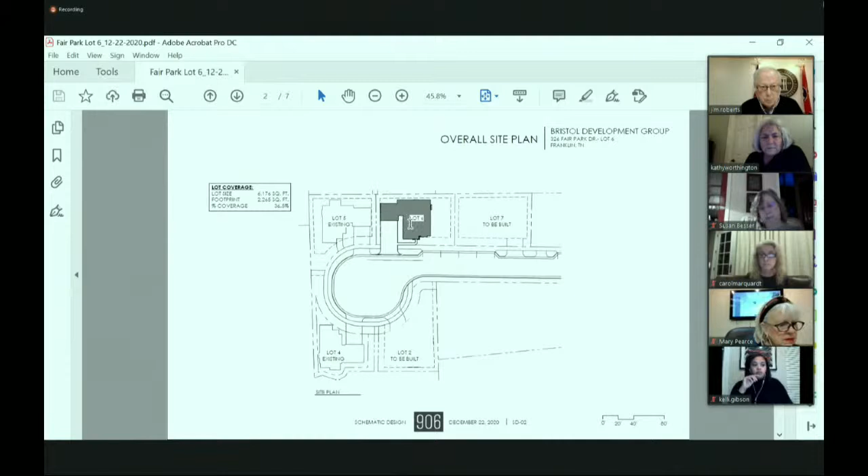Okay, so you can see on the screen here, the lot's not very deep, but it is a little wider. So it does allow for a bit of separation between these two forms, creating two masses instead of one. You can see the first floor plan here, the garage is attached with a small connector, and it does read very largely as two distinct forms. While the garage can't be behind it, I believe it meets the intent of the guideline that the massing is separated. Additionally, the placement of the garage helps serve as a lesser massed transitional piece.

You can see from this angle here toward the Fair Street Historic District and the historic forms on Fair Street. The height of the proposal at 29 feet is mostly consistent with the guidelines.

It is consistent with the portion of the guidelines that state infill construction should not exceed an average of 10% above or below the average height of buildings on the same block face, on the same side of the street. The buildings that have been approved for this street, which is a cul-de-sac street, range in height from 32-8, 29-11, and then there is a building on the same block face not part of the Fair Park subdivision that is approximately 34 feet in height.

The guidelines do also state, however, that the height of infill buildings on newly created streets should be compatible with the range of building heights on the nearest block face within the established historic district. The buildings behind this street on Fair Street range in height approximately from 24 feet to 31 feet. So it does fall within that range, but I don't have the exact heights and cannot do a conducive calculation to say if it's 10% above or below that average.

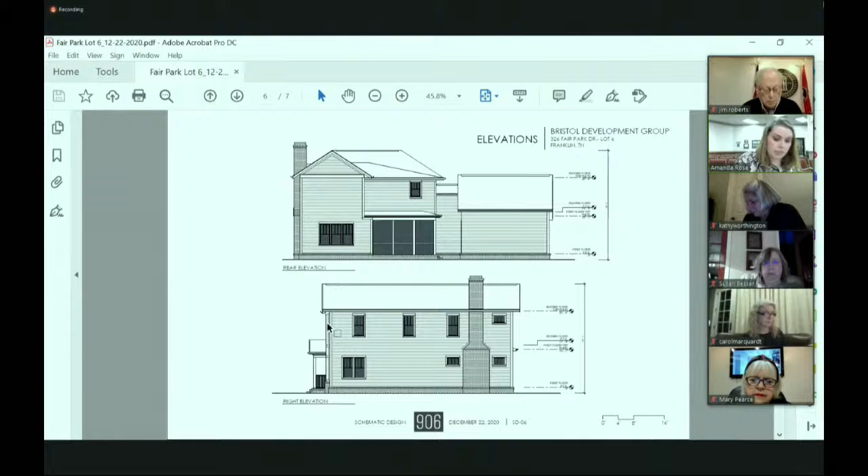Also, in lieu of using an awning on the garage doors, the applicant has extruded the roof line to create a covering over the garage door area. This is a treatment that allows for the perception of a roof dormer here, which actually is designed as a wall dormer. So it does appear to have a dormer that sits a couple of feet off the roof, even though it's truly designed as a wall dormer.

Again, this treatment is atypical to historic structures, but because this is an infill street and both the principal and garage structures are created on this newly created street, this interpretation may be appropriate.

The proposed materials are all consistent with the guidelines, though window specifications have not been provided at this time. The proportion and rhythm of the window openings are mostly consistent with the guidelines as well. I'll note that the applicant did alter the window in the front-facing dormer of the garage to be placed more consistently with that on historic structures based on a design review committee comment.

Regardless of the comments for design, the building itself cannot be recommended for approval as the building coverage shown by the applicant is 36.6%. The guidelines recommend that building coverage maximum not exceed 35% in specified residential zoning districts, including this one. With that, it would be recommended that the proposal be denied.

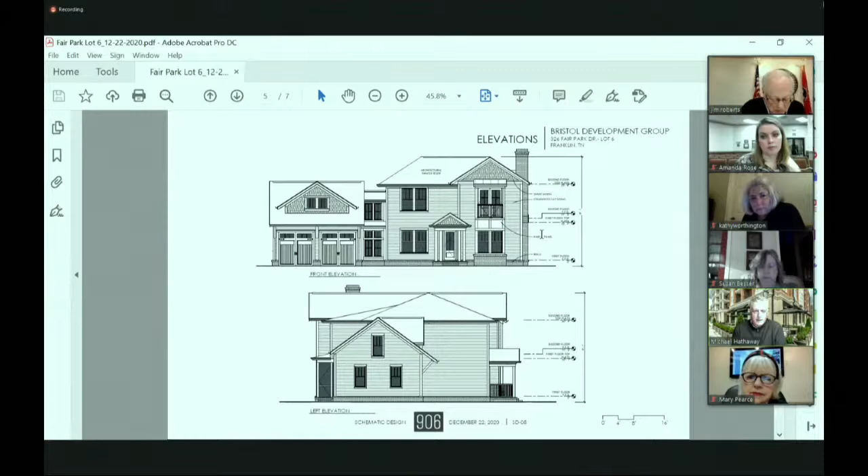Like it was said earlier as well, we have worked hard to keep the height low. I think we're at 29.1 now to the top of the roof, and that was after a lot of conversation and effort to try to get that down. So we appreciate your consideration of that as well, and we'd be happy to answer any questions, and we would ask for your approval.

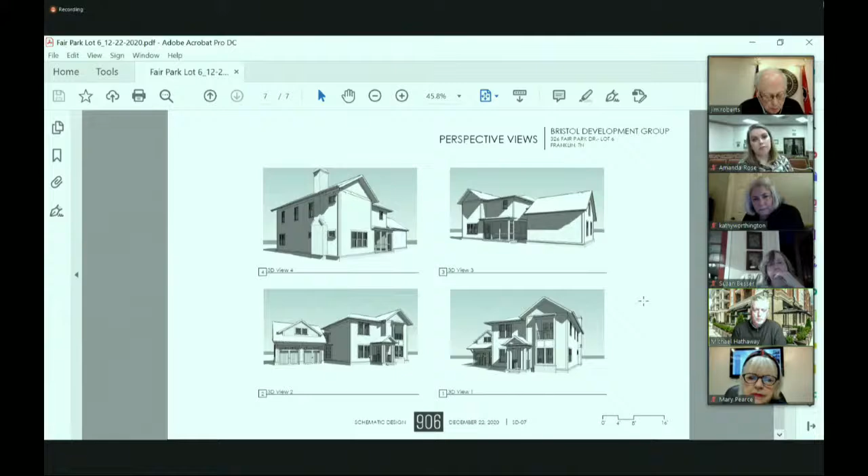Thank you. Are there any citizens who wish to comment on this application? Hearing none, is there a motion from the commission?

Mr. Chair, this is Brian. I'd like to start the conversation by moving that we approve issuance of a COA for the proposed new construction based on the staff analysis recommendations dated January the 7th of 2021. They're recommending denial, so I need to get a reason for the approval. Well, I'd like to continue this conversation about that 1.6%. Okay, all right, that's fine.

Is there a second to that motion to approve? I'll second, this is Lisa. Thank you, Lisa. Okay, now we're ready to discuss.

So, Mike, I do have a question. You said you've kind of done all you can to reduce that square footage, and you think this is where it needs to be. Could you elaborate on that a little more?

Sure. We worked really hard to make sure we create a house that's livable for our client, and that included the amount of square footage she needed for living space, dining, kitchen, as well as the garage. The garage uses up some of that percentage. Where it got larger was when we detached the garage and had that connector, which took us over that 35%. In practicality, other than the infill between the garage and the main house, we're at 35%. That just puts us over the edge when we have that connector piece.

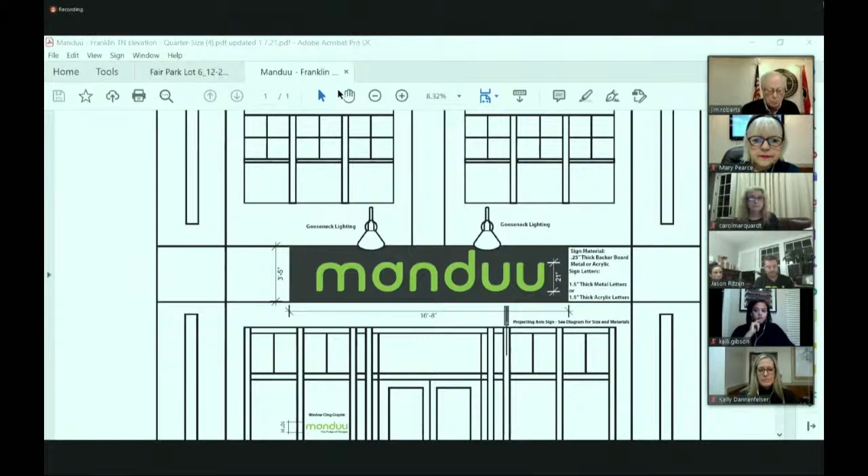The package includes a wall sign above the storefront and canopy, with gooseneck fixtures proposed to mount above it. I'm going to go ahead and share a photograph of that. This storefront isn't rendered exactly the same way it looks in real life, but you can see—I'll try to zoom out a little bit.

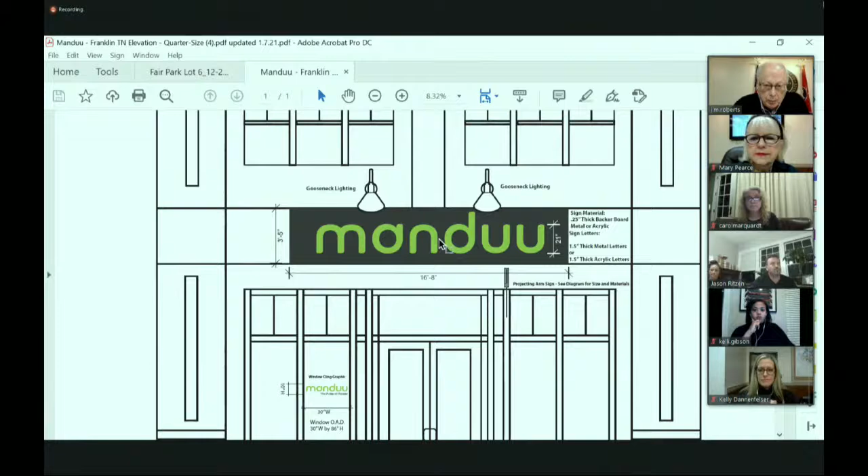The storefront wall sign is proposed to be over the canopy. There is a canopy that comes out from the building, spans the whole front facade, and this would be above that and underneath the second floor window sills. The applicant is also asking to install a projecting arm sign adjacent to the storefront. It would either be to the left of the storefront here or to the right, underneath the canopy. That would be a pedestrian specific sign.

And then the installation of a window decal sign. On the submittal you received, there was a black backer for the window decal. That backer was removed at staff suggestion so the applicant may have a little more flexibility in how the lettering is used and how it's configured on the window itself. The applicant did take that into consideration, and I appreciate that. So what you see is a little different than what you have in your packet.

As for the wall sign, the guidelines would recommend that wall signs be placed in typical locations similar to that on adjacent neighboring buildings. The wall sign's proposed to be at this location, rectangular in shape, and centered over the storefront entrance. This is a wider storefront than some of the tenant spaces in this building will have, and the applicant is proposing to put it centered right over the front entrance.

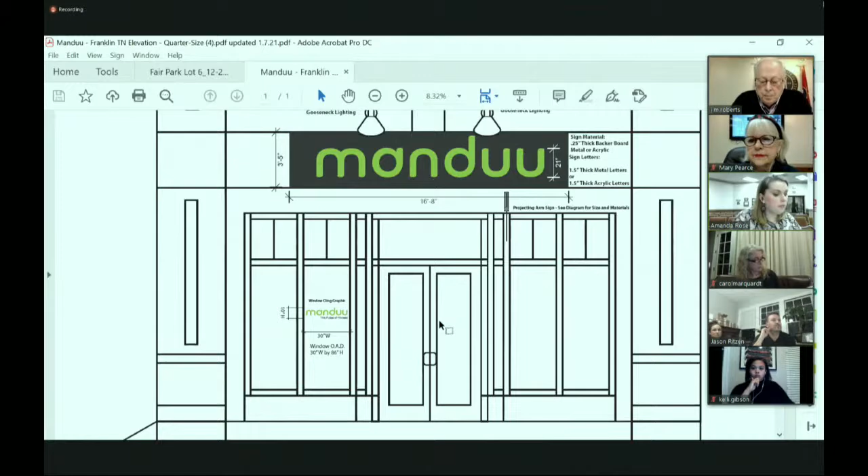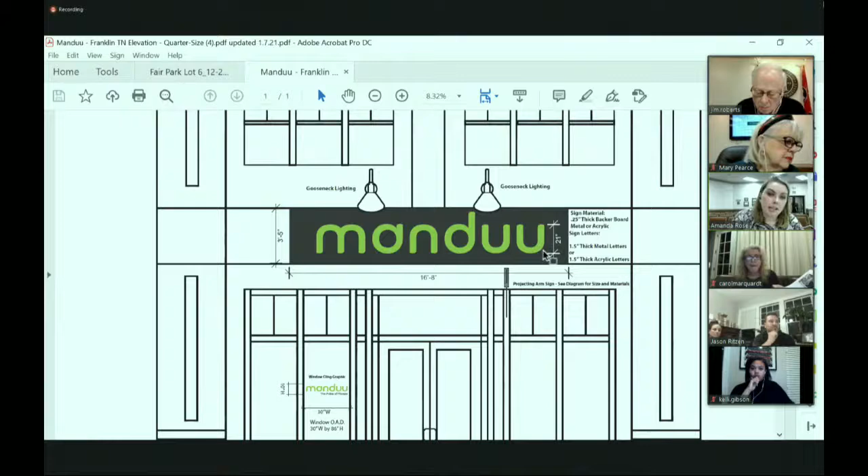The proposed location is very typical of neighboring buildings, but this storefront includes an approximate 1-inch vertical brick projection that bisects the upper facade between the two windows. I can pull up a photograph if that helps refresh your memory, but that 1-inch projection causes the sign placement to not be entirely consistent with the guidelines, as they recommend against placement of signage over any decorative detailing or original decorative designs. They also state that wall signs should be mounted to flat surfaces of the building.

So what the applicant has proposed here is to use a metal backer and have it placed flat on the brick that projects out, then use spacer bars underneath, about 1 inch thick, to allow the sign to be stable and flush against this brick, but not necessarily flush against the brick on either side.

The guidelines also state that materials should be consistent with what you would see historically, generally emulative of metal or wood. The backing is metal, and the lettering is metal or acrylic. Acrylic would not be recommended by the guidelines, as it's a lesser historic emulative material. The metal would be appropriate.

The color of the background is a dark gray, and the lettering is green. The proposed coloring is mostly consistent with the guidelines, though not entirely, as the recommendation is that the sign have a darker background than the lettering color, which is evident here, but signs should also complement the colors of the building. The green has, I believe, been adjusted slightly, perhaps from the branding green, but it's not entirely in keeping with the building brick itself.

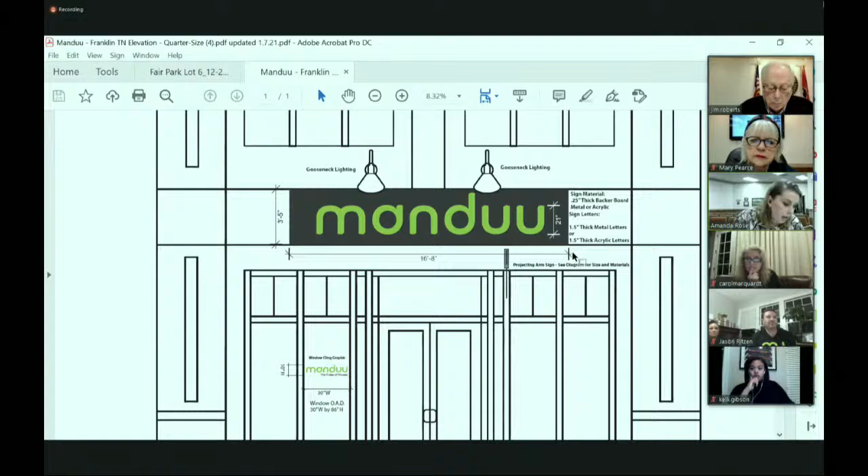The wall sign measures 3.5 feet tall within this quote-unquote cornice area, and another 16 feet 8 inches wide, which is not consistent with the guidelines. The guidelines would recommend that wall signs measure no more than 1 square foot per linear foot of the width of the storefront. I went out and measured the storefront this morning.

It's a beautiful morning to go out. It's super gorgeous right there by the river. And the storefront is a unique one, in that I measured from engaged column to engaged column.

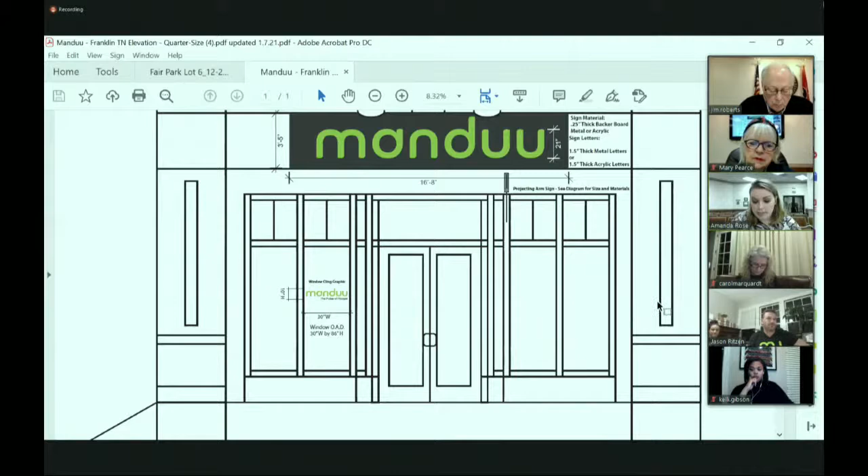This space between the two engaged columns is 24 feet 10 inches in width. Then there's another space where the columns are, where the color of the brick is still the same as the rest of the storefront, because, as you can recall, the building itself has slight color changes from storefront to storefront. If you count the area on either side where the color is still the same, that adds an additional 3.5 feet on each side. So with all that considered, the building facade would be about 32 feet wide.

Because of that, the guidelines would recommend that the wall sign itself, in order to maintain a sense of scale with the facade, measure no more than 32 square feet. This sign is proposed to measure about 58 square feet.

The proposed lighting consists of gooseneck fixtures here, and those are consistent with the guidelines, as the guidelines would recommend that light fixtures be used to illuminate from top to bottom, essentially, and that they be unobtrusive. This is entirely appropriate with what you see on other buildings, and is consistent with the guidelines.

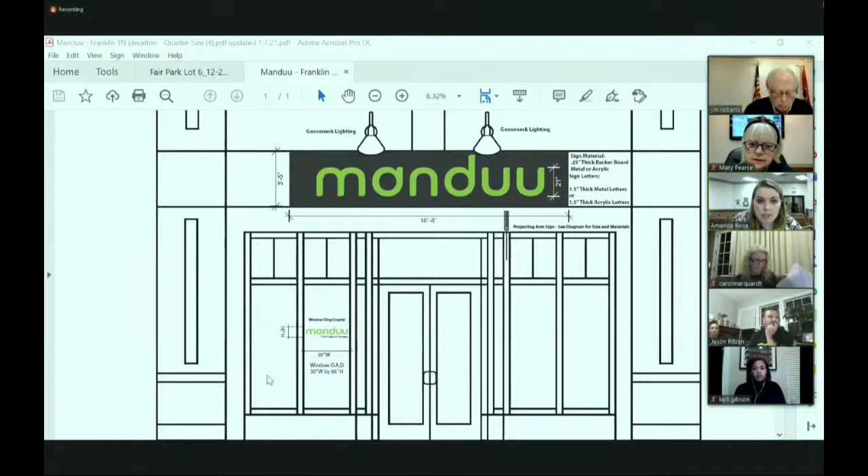There's also a projecting arm, proposed to be underneath the canopy. I'm going to pull that one up right now and share that with you. Can everyone see the projecting arm?

Similarly to the wall sign, it is a dark gray with green and white lettering. It is proposed to measure about 5 square feet in total sign surface. The guidelines would recommend that projecting arm signs not exceed 4.5 square feet, so this is slightly oversized in respect to the applicable guidelines. The sign's coloring is the same as the wall sign, which is mostly consistent with the guidelines.

The sign would need to be placed so that the bottom of the sign is mounted 8 feet above the grade surface, which in this case would be the sidewalk underneath the canopy. Because the proposal does not indicate specifically where this sign is proposed to go, it would need to be placed on either side, either left or right, not above the storefront, and be 8 feet above.

The window decal sign, I'm going to switch back over.

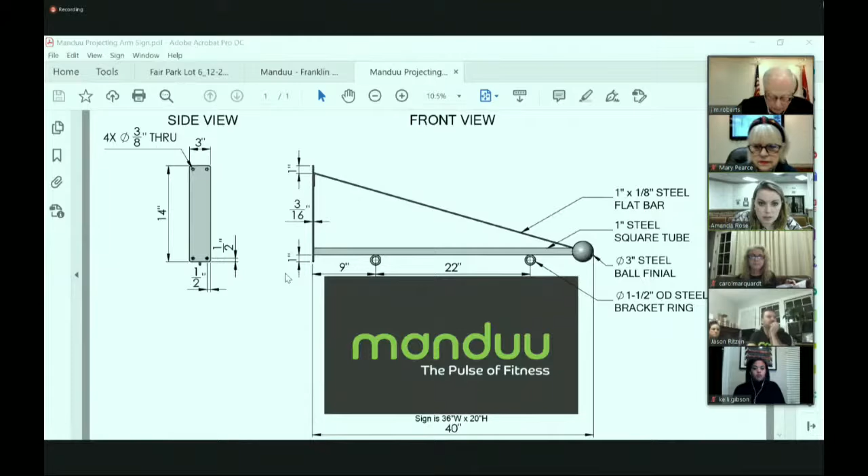There it is. The window decal is proposed to go here. The guidelines would recommend that window decals consist of lighter lettering and not distract from the building facade or engross the window. This design is entirely appropriate.

The ordinance under which this building project has been approved is the previous ordinance, which states that the window decal can measure up to 25% of the window glazing, and I believe this is sized to meet that. Of course, that's something they'll be asked to consider at the sign permit stage. But please note, these notes under here are not part of the window decal — it's just this right here, and it appears to be entirely appropriate.

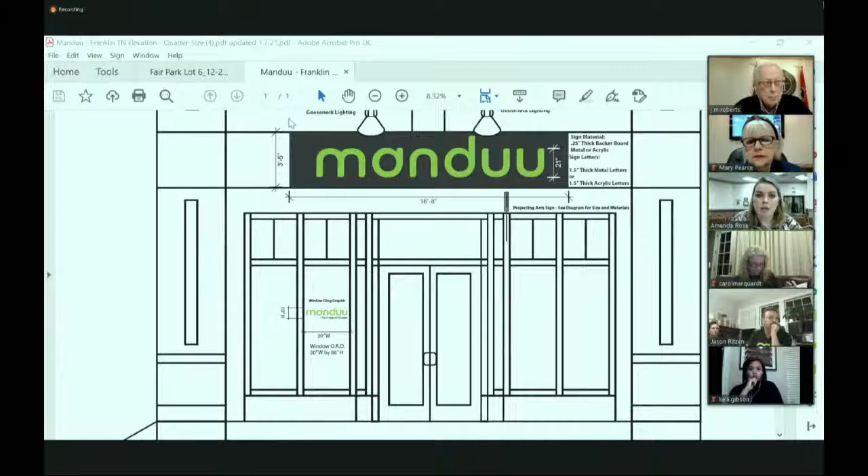With that, it is recommended that we have two different motions. One motion would be to deny issuance of the wall sign based on staff's comments that the sign placement does not entirely meet the intent of the guidelines. That would be something that would need to be considered by the commission, as this is a unique situation.

If the commission determines that the sign placement is appropriate, the applicant must confirm the storefront width — we believe that to be about 32 feet — so that we can determine the appropriate sign size based on the guidelines, and that size would need to be rescaled accordingly.

So from what I've gathered, the 58 square foot sign would need to be reconfigured down to no more than 32 square feet. The application must meet all the other requirements of the Building and Neighborhood Services Department prior to issuance of a sign permit, and any changes returned to staff or the commission for review prior to approval.

As for the projecting arm and window decal signs, it would be recommended that the commission approve with conditions. The conditions being that the window decal sign as shown tonight be accepted, and that the projecting arm sign measure no more than 4.5 square feet, which would require a slight modification to meet the applicable guideline, and that be submitted to staff for review and approval prior to issuance of a sign permit.

That the wall on which the projecting arm is considered be indicated to staff as well, and demonstrated that the sign face is measured a minimum of 8 feet from grade to meet certain code requirements. And that is all. Thank you.

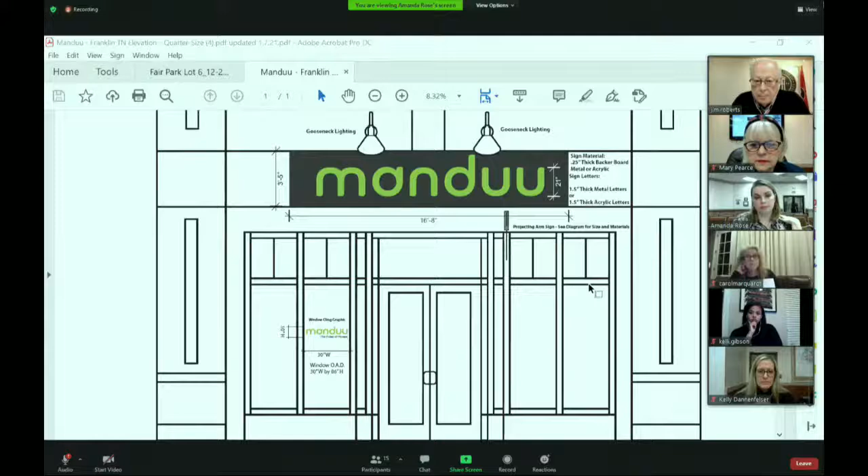There's a couple ways we could do this. Number one, the standoffs aren't ideal because, as a landlord myself, I understand stuff gets behind it and you don't want that. We could thicken the backing of the sign on either side so that the backing is absolutely flush with the brick at all locations. It would appear as though that brick outset simply terminates at the top of the sign. Okay, that seems to make sense to me.

I can pull the brick and make them flush underneath, which I'm not sure wouldn't do the same thing. But I believe our signage guy took a little bit of liberty in this rendering simply to make the backing match where maybe there's different ways the bricks were laid or something like that. But the backing can adjust to whatever size it needs to be.

The real thing is how to address this, it doesn't exactly matter what the overall size of the sign is, so long as it fits under 32 square feet, no big deal. We're fine with that. We just don't want it to look silly being on one side or the other. So I think the real question is how do we achieve placement of the sign in such a way that it looks right.

Because this is not the only example of this particular building we're going to run into, or you guys are going to run into, on a go-forward basis. So I'm kind of open to discussions and suggestions on how to do it. I just think it'll look silly if it's placed on one side or the other of this accent that's the same color as all the surrounding brick.

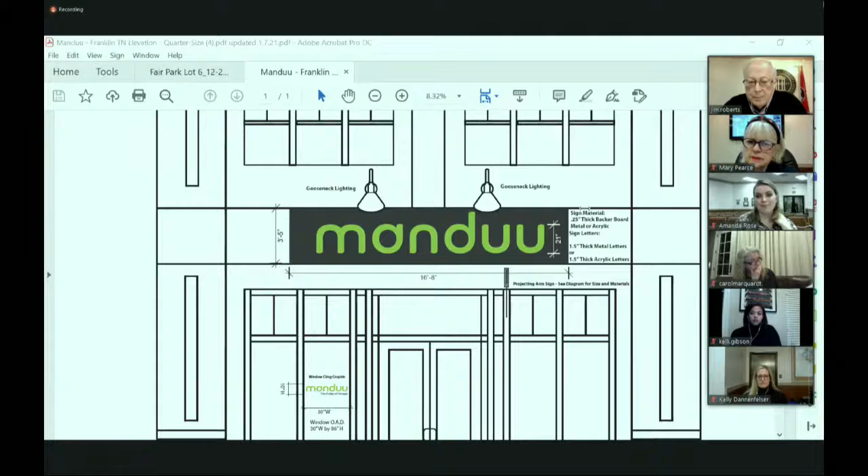So I'm kind of open to whatever everybody's got to say. Okay, well, we'll get into that. Are there any citizens who wish to comment on this application? And Commission, let's do this in two motions, one on the wall sign and then one on the projecting arm sign and the window decal. So is there a motion on the wall sign? Then we can discuss.

I'll move to approve the wall sign with staff comments. All right, that's going against the staff recommendation, Mary. On the wall sign? I don't mean the wall sign, excuse me, forget it, thank you. I thought we were talking about the arm.

All right, now comments. And let me just say at the outset, Mr. Fitzen, I don't have any problem with the way you've got it positioned here. The problem is the size of the sign, 58 square footage versus 32 square feet, assuming we're taking both of those vertical columns as part of your storefront, which I don't have any problem with.

So I think the main thing is it needs to be reduced in size. That would be the best solution. The mounting is fine, and I agree with you. It doesn't need to go left or right. I don't think you need to have any bricks removed. I think if you stub it off the wall an inch or 2, then you've solved that problem. So, other comments?

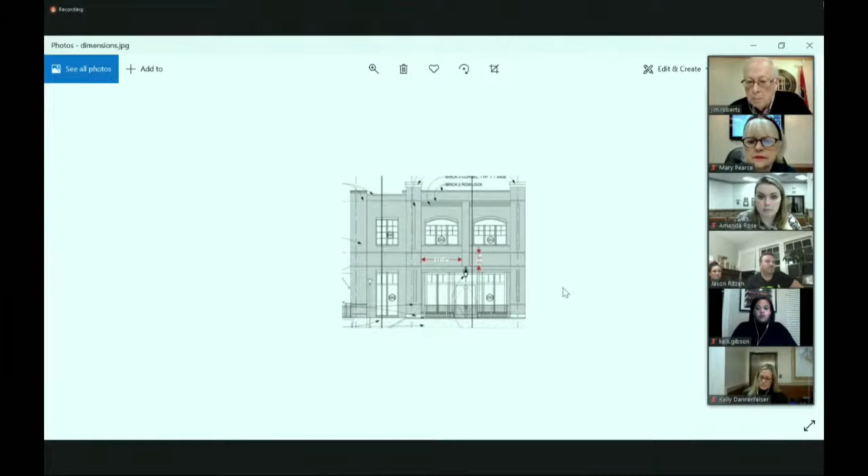So I think we won't see this every time we have someone come through, but it is something to keep in consideration. And then also reflecting back on some of our sign challenges with the building across the street, I think it behooves us in the future to keep those signs in mind as we look at storefronts and think about approvals of infill buildings in this situation. And Ms. Baker, I apologize, I understand what you were saying now.

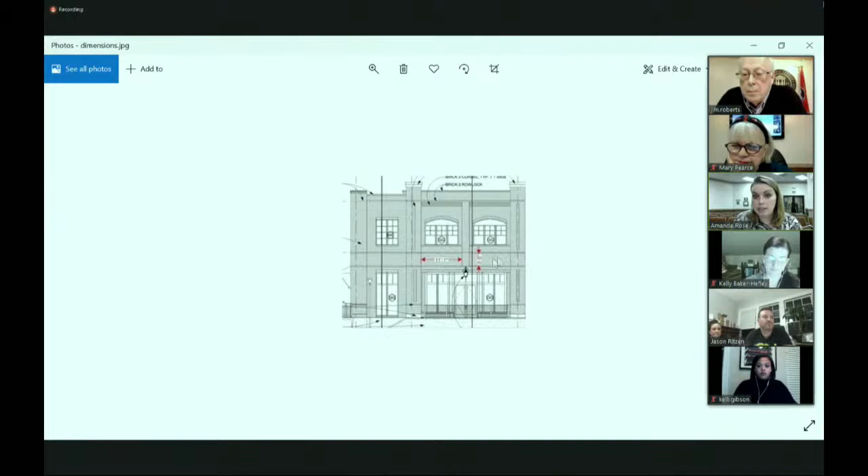You are absolutely correct. This is one where it did have 2 entrances, and it was brought to the Historic Zoning Commission's attention by staff that the architect for the entire building, not this particular applicant tonight, wanted to combine those into one storefront. So you're absolutely correct that this won't be an issue on every storefront that moves forward, unless there is a request in the future by the building owner to combine storefronts.

So for that reason, I'm more comfortable with this solution, especially given that we've got brick colors that sort of mask it a little bit. But just something to keep in mind as we look at future buildings, I don't think we've necessarily considered sign placement as we've looked at buildings and the way that they're constructed and the facades. And so something just to keep in mind in the future.

Okay, other comments? I have a comment. Oh, go ahead. Jason, I'd like to know, how does the awning affect the sign? Is it one large continuous awning that is mimicking the sign, or is it two awnings that go over each bay? No, ma'am, it's not a—

When you say awning, this is a structural—it's a flat panel, is it not? I can help answer that. And for everyone's understanding, Ms. Worthington is new to the commission as of today, and so she did not have the background on this building that some other folks may have.

It is a continual integrated brick canopy that comes over the sidewalk. And it's there because of considerations with how the building had to be constructed in light of the floodplain that a portion of the building is situated in. And so the canopy is below where the applicant is proposing the sign, but just below it. It extends the whole frontage of the building. Does that help? The structural overhang, you can walk underneath.

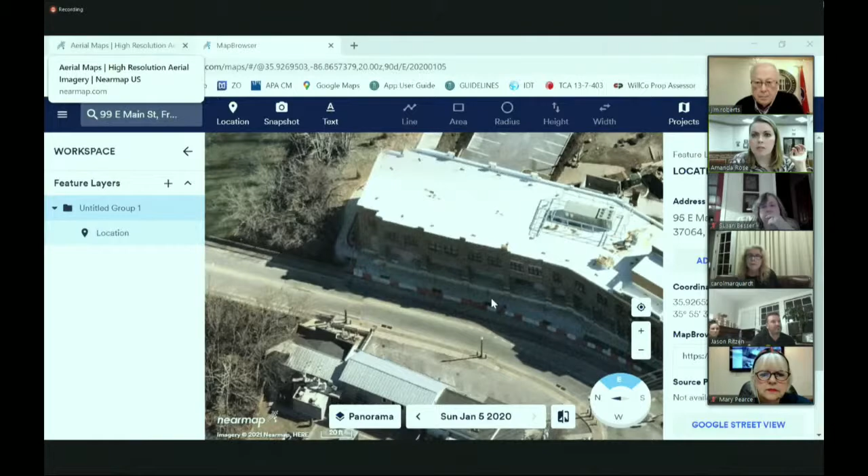Show the building really quickly, just so everyone can be familiar with that. I want to make sure everyone understands. Mr. Ritzen's explanation was a little better than mine. The canopy doesn't stick out as much as the upper story cantilevers to create a canopy, so the area we're talking about is right here. Does that help?

Okay, I'm sorry to interrupt, I just want to make sure - more or less a breezeway? Correct.

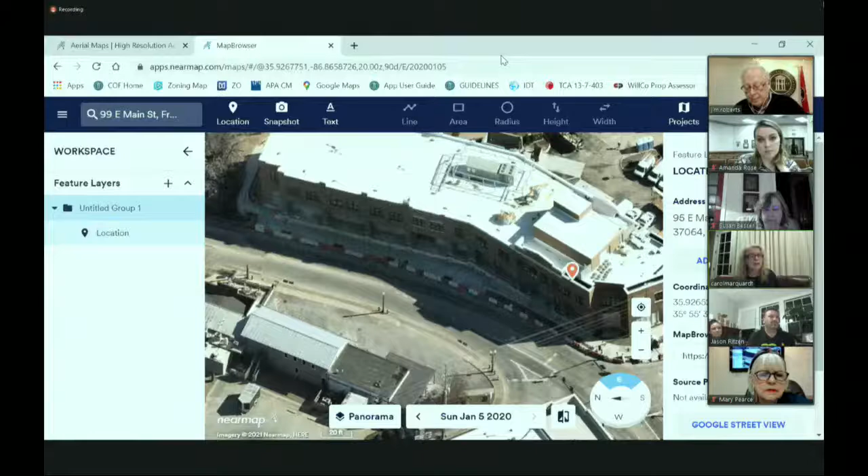Ms. Marquardt, did you want to make a motion to defer? Yeah, I think because, and I understand the applicants are between a rock and a hard place here, but there may be options we have not considered yet. So I would make a motion that this be deferred to design review.

You'd refer it to the next voting meeting, and they can come to design review. Yes, exactly - or defer to the next voting meeting and come to design review so we can consider some options. Is there a second? I will second. Thank you, Mary.

All right, we got a motion to defer, which overrides Mary's motion to deny. Is there any more conversation about that?

Mr. Chair, this is Susan. I just want to iterate that I think if the applicant came back with a sign more in keeping with the square footage of our signs, that would really help, because what's most apparent to me is that the proportions are really off with this sign. I think that will help us visualize what it could be. Thank you, good comment.

Okay, if there's nothing else, then please respond - this is a motion to defer. Question, quick question? Could I ask a quick question? Yeah, quick.

What I'm hearing generally is that you want me to come back with the appropriate square footage, same layout as I described. You may come back with another layout, you may decide to do something different - your sign designer needs to maybe have some other ideas. That's the purpose of design review. And yeah, you can come back with a different layout, a different size. Just looking for some guidance, that's all.

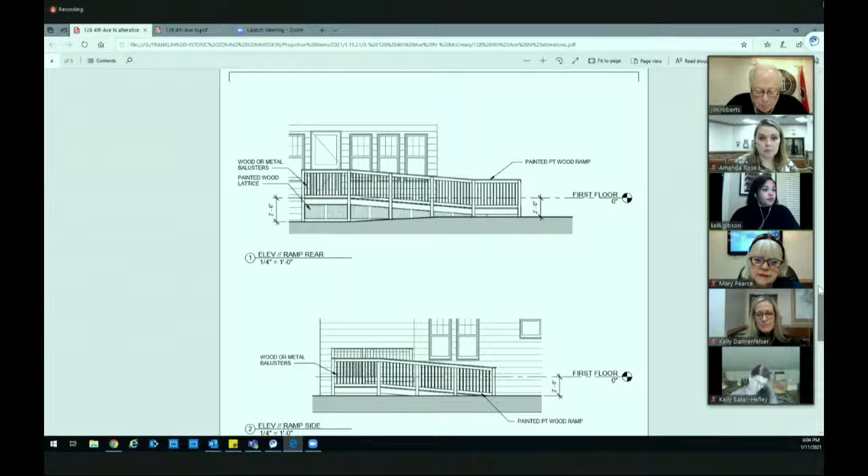The HVAC pad located here will be located on the rear elevation of the house, between the building here and the ramp here. The ramp provides screening to the HVAC units. The guidelines recommend that utilities be placed and screened to minimize their impact on the district, and recommend the use of placement, landscaping, and/or fencing to hide trash or utility units. The proposed HVAC placement is consistent with the guidelines.

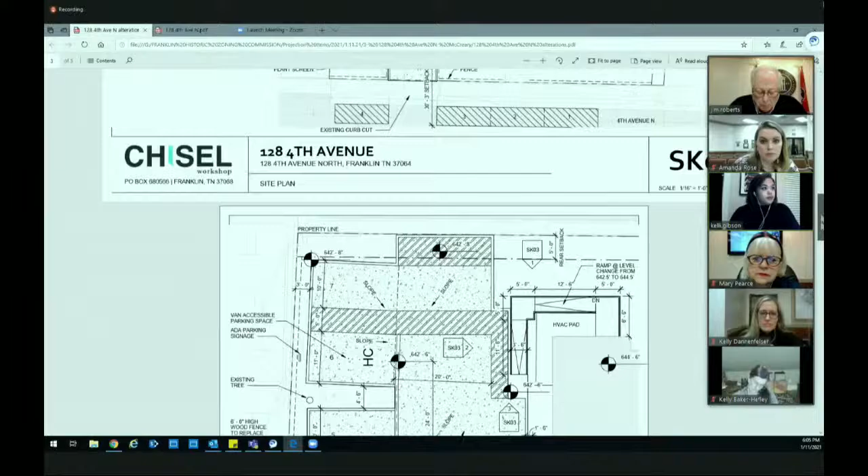The guidelines recommend that driveways follow historic patterns, be located along rear or side elevations, and should be landscaped to mitigate impact on the district's historic character. Driveways and parking configurations are required to meet the standards set forth by the zoning ordinance. The proposed concrete parking area, seen here, is located on the side of the building, but behind the facade of the home. Landscaping will provide screening to mitigate the impact to the district. The proposed parking and driveway alterations are consistent with the guidelines.

So for the ramp construction, HVAC placement, and parking and driveway alterations, it is recommended that the commission approve with conditions the proposed alterations as follows: wood balusters should be selected for the ramp for consistency with the guidelines, and the application must meet all requirements of the Building and Neighborhood Services Department, including but not limited to meeting minimum parking requirements. Any additional changes to the approved plans must be returned to the commission for review and approval. Additionally, staff has listed some information in the staff report for the applicant to consider before applying for permits. Thank you.

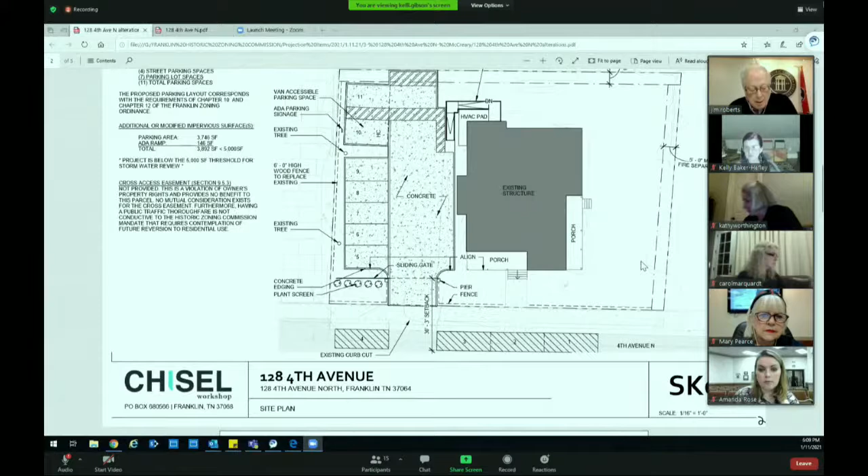The proposal includes the replacement of existing wood fencing along the western property line, seen here, and the construction of aluminum primary yard fencing, seen here and here. The proposed wood fencing is 6 feet in height and extends along the side yard of the property and into the primary yard. As proposed, the fencing is not consistent with the guidelines, which recommend that wooden plank fencing be recessed at least 20 feet from the plane of the residence's primary facade, and fence height should not exceed 3 feet in the primary yard.

Fencing style specifications were not included in the application and will be required in order for staff to fully review that request. The proposed aluminum fencing with brick piers extends across the primary yard of the property here and ties into a sliding gate of the same style and materials located at the entrance to the parking area on the side of the house here. The proposed fencing is consistent with the guidelines for height, 3 feet, but not for style.

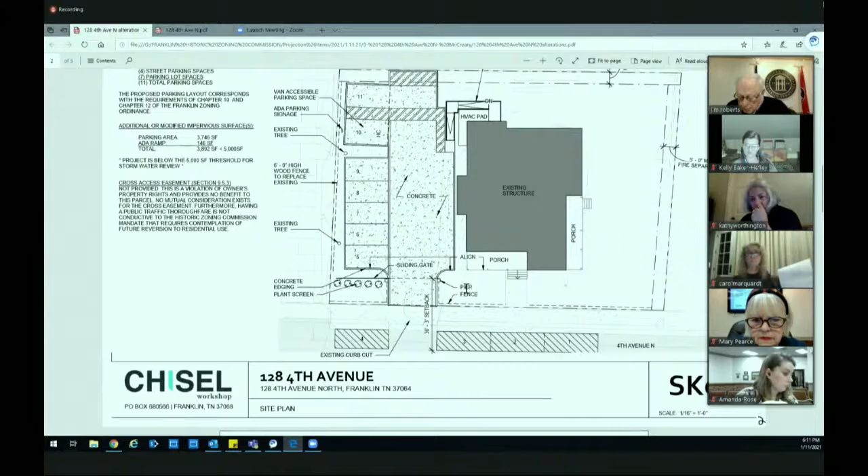The guidelines recommend against the use of aluminum fencing in primary yards and instead recommend the use of wooden picket fencing, as wooden picket fencing is the most common fencing material for primary yards. Other appropriate fencing materials include open weave brick or cast iron designs. As the property is a vernacular frame house, a wooden picket fence would be most compatible with the surface materials of the building. The guidelines also recommend against the use of sliding gates, stating that front yard entrances should not have sliding gates. Sliding gates should be avoided in general, and operable gates should be configured to swing inwardly and not open onto public sidewalks.

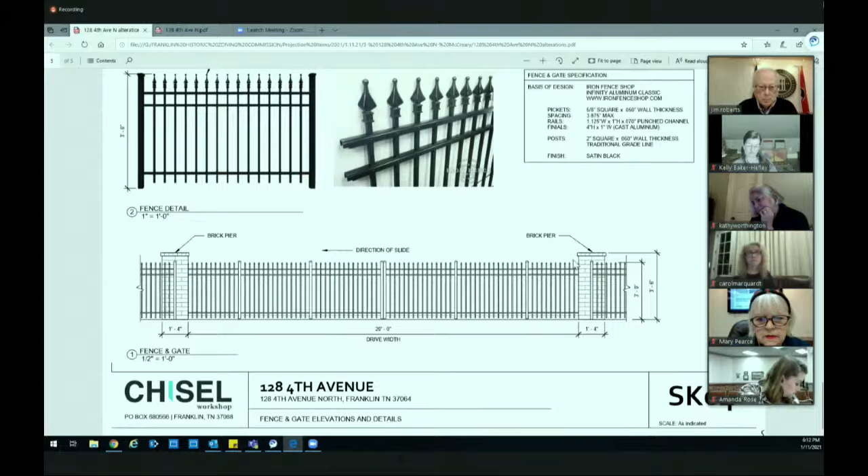It is recommended that the commission deny the proposed fencing with the following conditions: if issued a COA, the application must meet all requirements of the Building and Neighborhood Services Department. Any additional changes to the approved plans must be returned to the commission for review and approval, as primary yard fencing is not eligible for administrative approval. Thank you.

Thank you, would the applicant like to comment on the fencing? Yes, we would like to discuss it a little bit. Starting with the side yard fencing, the one on the left side of the property between that and the building next door, there is a fence there already. The intent was just to replace it in kind. We're not extending it or changing it in any way, other than it's deteriorated to the point where it's no longer viable and is a hazard on the property. So does that play into your interpretation or consideration? That would be our first question.

Mr. McCray, could you please indicate where that existing fence terminates on the property? Currently, it terminates at the end of the furthest down parking space. Okay, right about here, following this dashed line and arrow. I see, okay. Typically, when fences are removed, they're requested to be placed back in keeping with the intent of the guidelines. That's fine.

Mr. McCray, do you have any picture of that existing fence? There's not a great picture. I think it can be seen a little bit in the Google Earth Street View or Google Maps Street View, but I do not have one offhand that I can provide.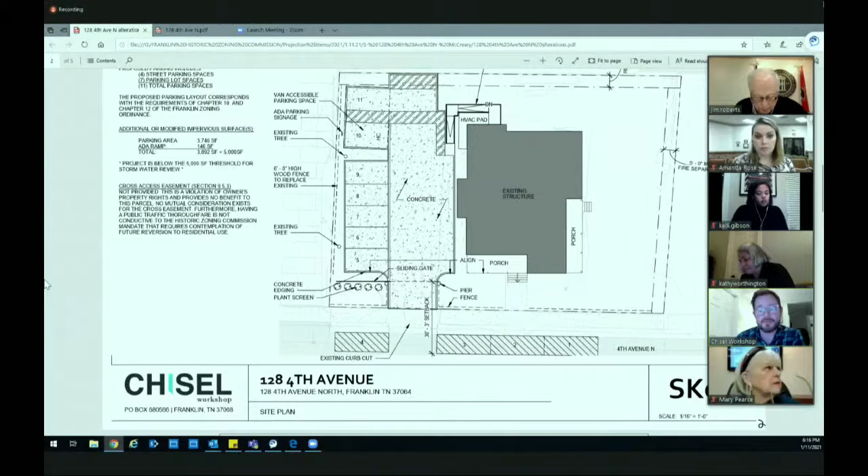Okay, is that all you've got on the side yard fencing? Would you like to talk about the front yard fencing? I would like to talk about the front yard fencing. I think we don't have any major objection to a different style of fence. The planning commission or staff's recommendation of a wood fence instead of a metal fence seems to make sense. As long as we could use that, I guess, will we need to come back before the commission with a different fence design to go forward, or is that something staff can approve based on set design standards for wooden fences in front yards?

So staff is not able to approve primary yard fencing administratively. That would have to come back before the commission.

And then a question on the sliding gate. I know that kind of is a hang-up for a lot of things because it's looked on poorly, and I think usually they're done very poorly. But I think the intent here was that the sliding gate would be open during business hours and only closed after hours for this property. The appearance of the gate would be that of any other regular double swinging gate. So if you look at the elevation on that last page, the intent would be to make it look like two separate panels that are just closed. So the only time you would know it's a sliding gate is when it's in operation. Otherwise, it would be screened by the landscaping on the left side of the entry drive.

So with that information, does that cause any different thoughts within the commission? Well, we'll see. Is that all you had, Mr. McCreary? Yes, sir. Okay, are there any citizens who wish to comment on this portion of the application?

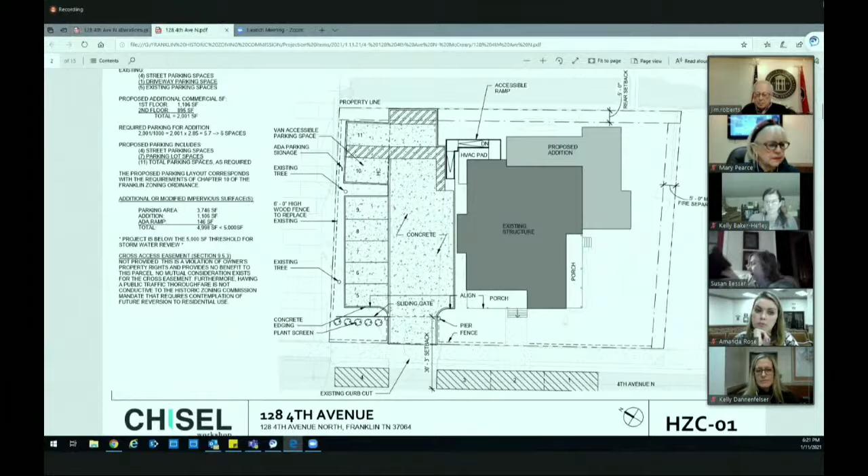Proposals related to the item appeared before the DRC at its March 16th and May 18th, 2020 meetings. The guidelines support the placement of additions on rear or obscured elevations with limited visibility. The proposed addition is located on the side and rear elevations of the house. Designed at a 1 1/2 story scale, the addition roof ridge height matches that of the front-facing gable.

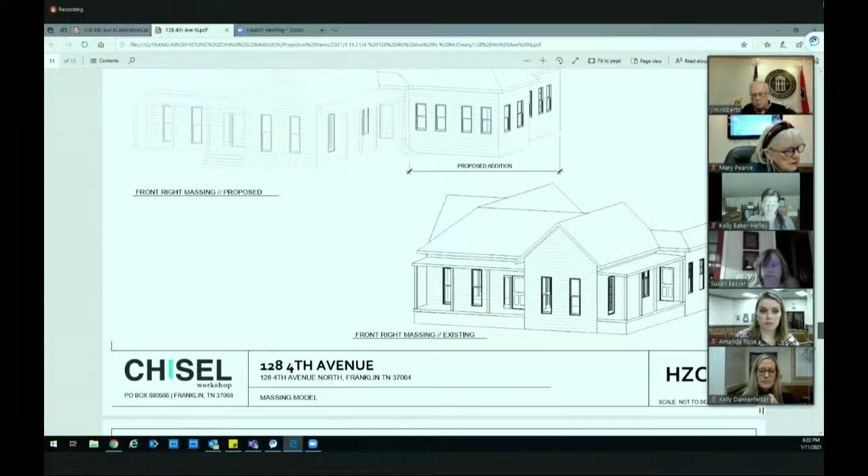Here you can see the existing historic house and the area with the addition. The portion of the addition located on the side elevation of the building is recessed from the plane of the building facade behind the side elevation porch. Here you can see the primary facade of the building, existing at the bottom, and the location of the proposed addition. So it's located on the rear as well as the side elevation of the building, but recessed behind the porch located on the side elevation.

The guidelines recommend that additions be designed to be clearly contemporary and compatible with the proportions, form, materials, and details of the building, and be limited to no more than half of the footprint of the original building. The historic building must be clearly identifiable, and approaches that unify the existing structure and new construction into a single architectural whole should be avoided.

The proposed addition is differentiated from the historic structure through the use of insets and some material changes, in this case, the foundation. The proposed roof material and siding will match the existing structure. TPO membrane roofing will be placed on a small flat portion of the existing roof.

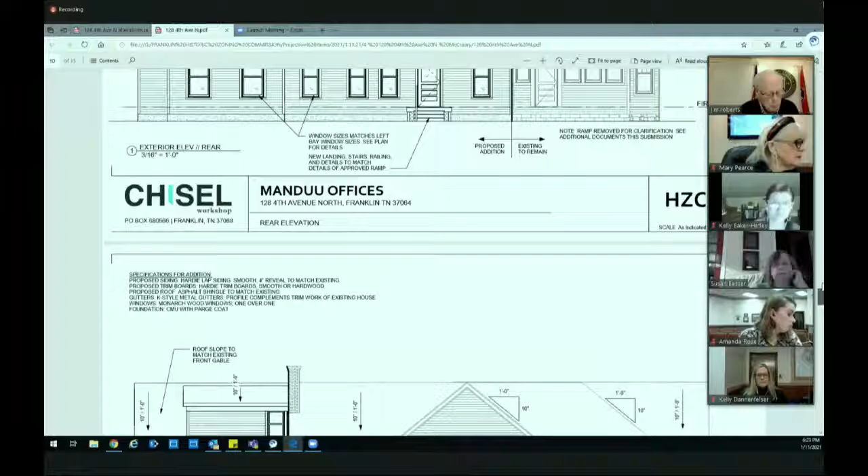So now we're looking at the rear elevation. The proposal includes a gable and gabled dormers on the rear elevation of the house. The window located within the gable, seen here, gives the appearance of a half story. The window should be removed to lessen the perceived scale of the addition, since the historic structure is a single story. The dormers are located and scaled appropriately. For compatibility with historic equivalents, the dormers should be set back 2 feet from the exterior facade wall.

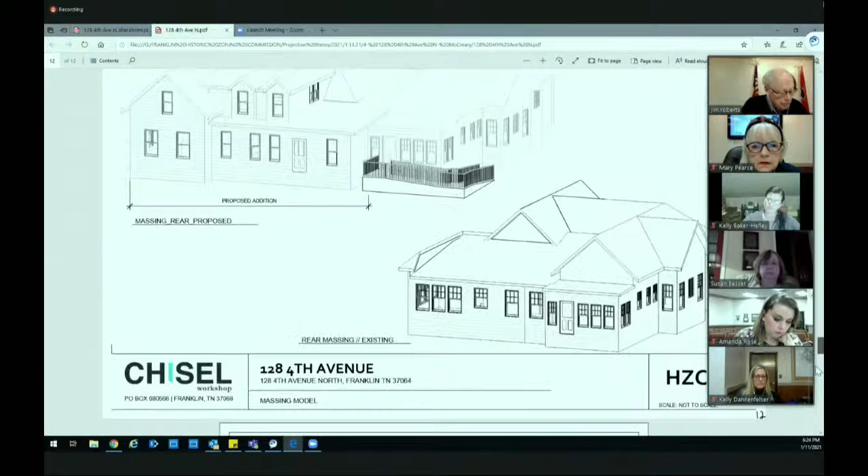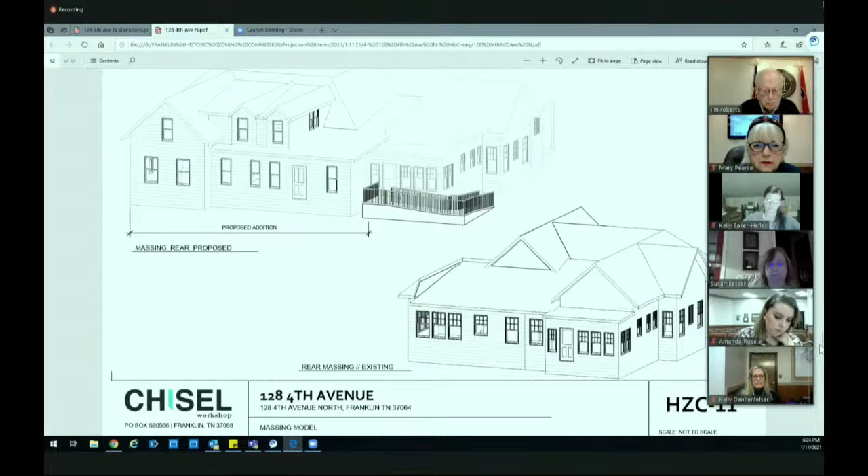The window located on the side of the dormer, seen here, should be removed, as this is not a typical location for windows. The proposed addition skylights, seen here, appear to be consistent with the guidelines, which recommend that skylights be installed in locations not visible from the street.

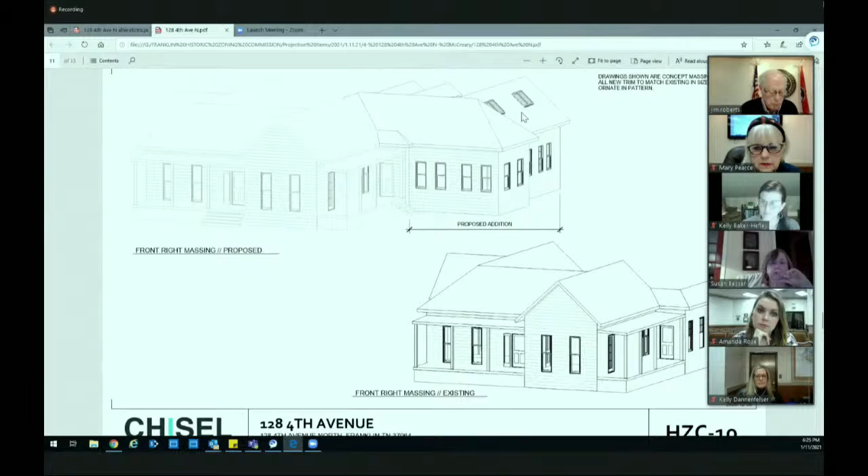The footprint of the proposed addition measures 1,106 square feet, or approximately 38% of the existing structure. The addition size is consistent with the guidelines, which recommend that additions be limited to no more than half of the footprint of the original building. The original building is defined to include all portions of the building that are 50 years old or older. The proposed building coverage, 29%, is also consistent with the guidelines.

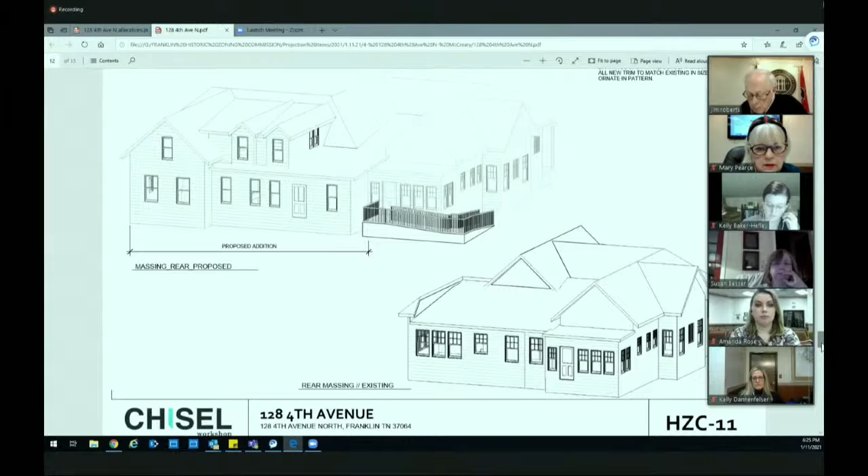The proposed smooth Hardie lap siding with a 4-inch reveal and the proposed foundation material, CMU with parge coat, are consistent with the guidelines. TPO membrane and asphalt shingle roofing is also consistent with the guidelines. The proposed windows are composed of wood and appear to have historic dimensions and profile. The proposed style of trim boards is appropriate in light of the guidelines, but the K-style metal gutters should be half round or round for consistency with the guidelines. One moment.

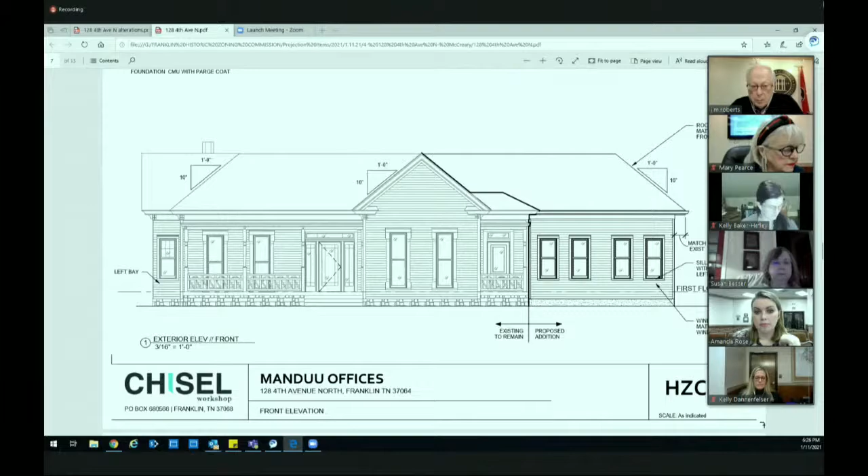Here's some additional 3D drawings showing the perspectives from the front and front right. So here is straight on to the primary elevation of the home, and you can see the addition here. And this is from the perspective from the front right, with the addition shown here and the existing shown here.

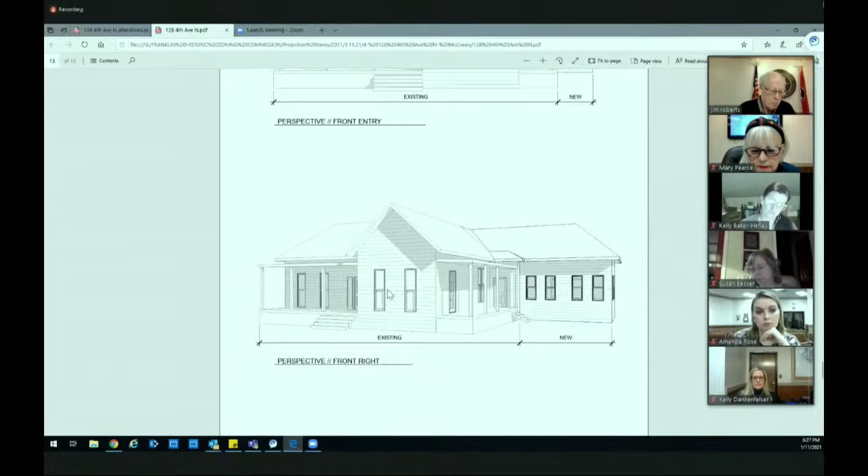Based on updated information from the applicant, the proposed addition's square footage as shown on the plans would require 12, and not 14, parking spaces. These submitted plans do not appear to reflect this requirement. Parking requirements will be reviewed by the Building and Neighborhood Services Department in the building permit phase.

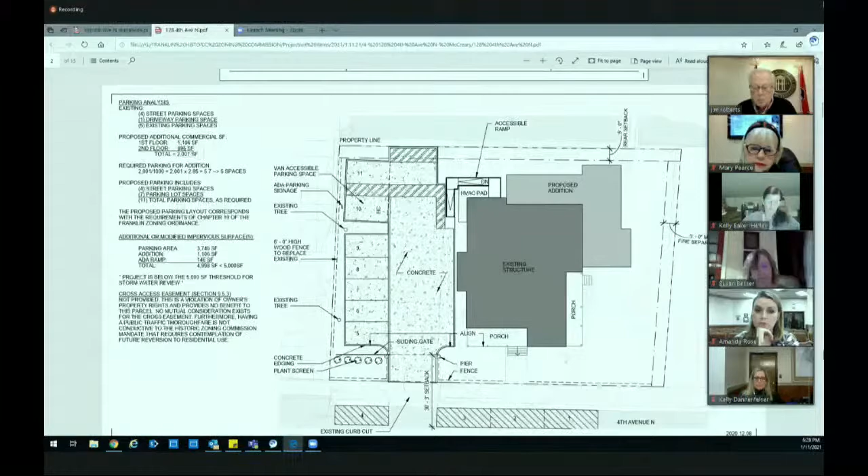And I believe staff had one additional comment on the dormers. One moment. Amanda, did you have a comment? Sure, I'm happy to speak to that.

The dormers on the rear are an appropriate location. This is a unique situation in which the existing addition on the rear has a very flat roof. Not entirely flat, but it is very flat, and the applicant's proposing to take advantage of that flatness in order to add some upper story space to the building.

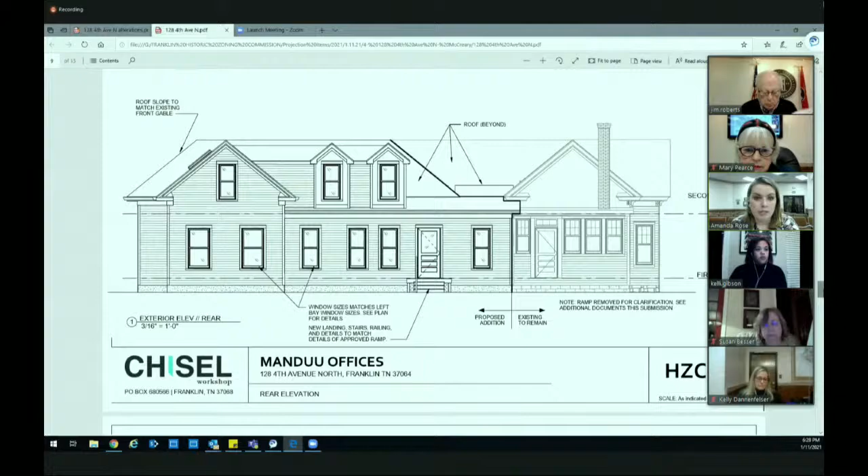Ms. Gibson, if you could turn, please, perhaps to a side angle where I'm seeing the, yes. That rendering right there is perfect, thank you. You can see on the rear, if Ms. Gibson can point out the dormers I'm speaking to, it is one dormer. It is shaped to appear as two gabled dormers in a way, in order to help keep that slope down. It also has a window on the side, which is a bit atypical.

So it would be the recommendation of staff to remove that window to be more consistent with dormer treatments throughout the historic district. But if at all possible as well, and I'm not sure it quite is, to perhaps reconfigure the appearance of the two gabled dormers that are really one dormer, to have a shared roof slope, so it appears to not have gables at all, perhaps just be a shed dormer, because the applicant is trying to keep a semblance of the roof shape you see adjacent to it, and to keep the slope down so it doesn't pop up above the existing roof line. But I do think a shed would be appropriate there so that it doesn't appear to be two gable dormers that are situated very close together. Thank you.

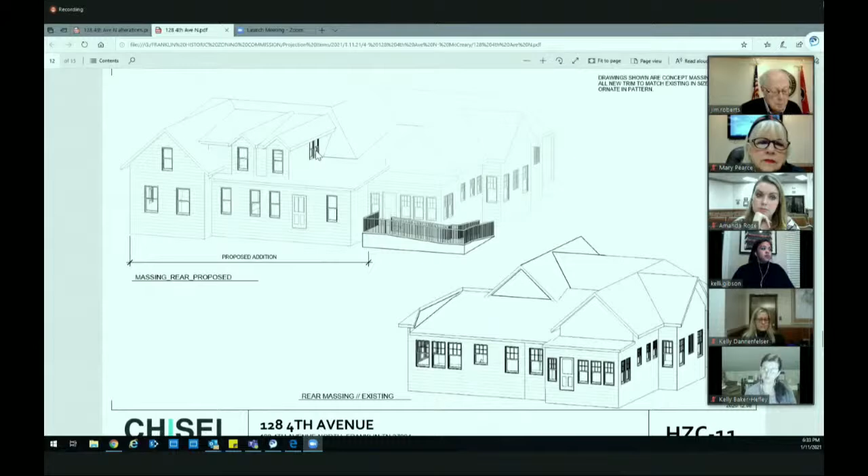So we'd like your consideration on these windows because they aren't visible from really other elevations and they're hidden back on the back. It's also the one on the side of the two gable dormers. They're, I think, sheet— if you can go to sheet, it's HZC09.

So on that sheet, you can see kind of on the left there's a little bit of that window that you see, but for the most part, that is screened from view as well. Really, the only time you would see it is if you were on the property in the back corner looking up at the house. So again, that's an office space that would have no windows in it at all without that window right there. So we request your consideration on that one.

And I think those are really the main things that we wanted to talk about before you all discuss it. Okay, thank you.

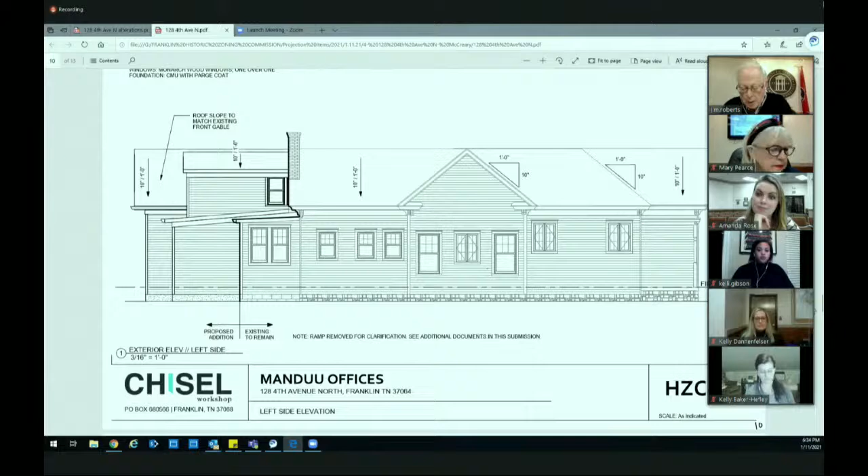Are there any citizens with comment on this application? Hearing none, then we need a motion on the addition.

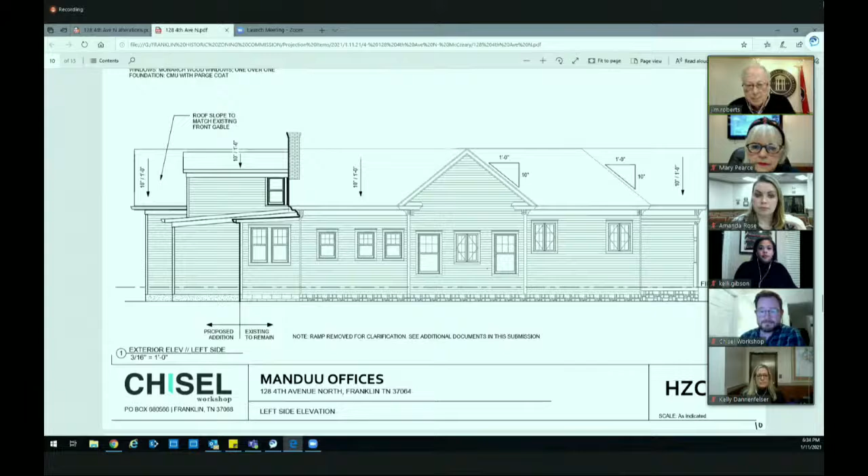From someone. Don't everybody speak at once. Is there a motion?

Mr. Chair, this is Brian. I'd like to move that we defer to the next voting meeting of the Historic Zoning Commission. All right, and talk about your reason for deferral on this one. And also to invite the applicant back to the DRC.

I think there are a lot of issues dealing with the dormers, the shed dormer, the gutters, the scale and proportion, and the massing of the addition to the original. And I think further discussion is warranted.

All right. Is there a second to that? I'll second that. This is Susan.

Okay, Susan, do you have any other comments on this? I tend to agree with Mr. Laster. I think when you start putting an addition to the side of a building, it's more difficult, more challenging. And there are a lot of things going on with roof lines and that sort of thing. And I'm not comfortable with the project as it is right now.

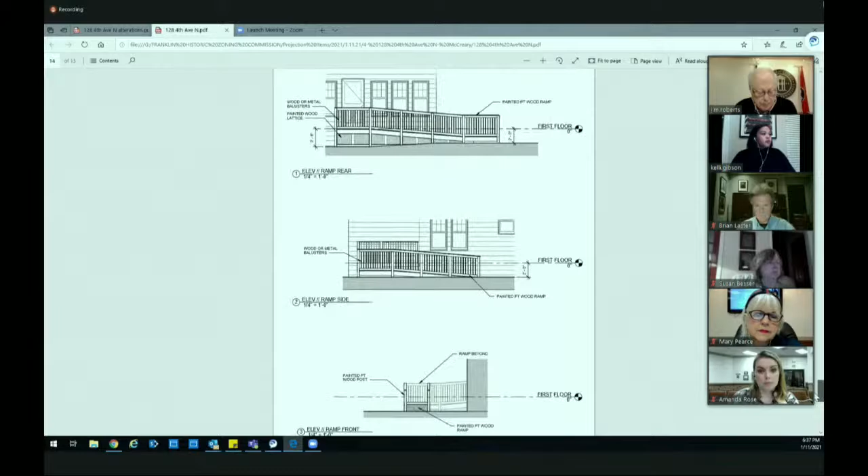Especially from the street, which is the perspective front entry, the top one on the sheet, you really can't see— the addition does not overwhelm the existing property. And also on HZC 03, you can kind of see more, a lot of the mass of the addition is also around the back. It's an L shape around the rear right corner of the property.

Would it help the commission if the applicant provided some photographs with markings out there showing where the overall addition would fall? Would that help this commission when they come to design review, assuming we defer this? Absolutely. Are there others who want to respond to that?

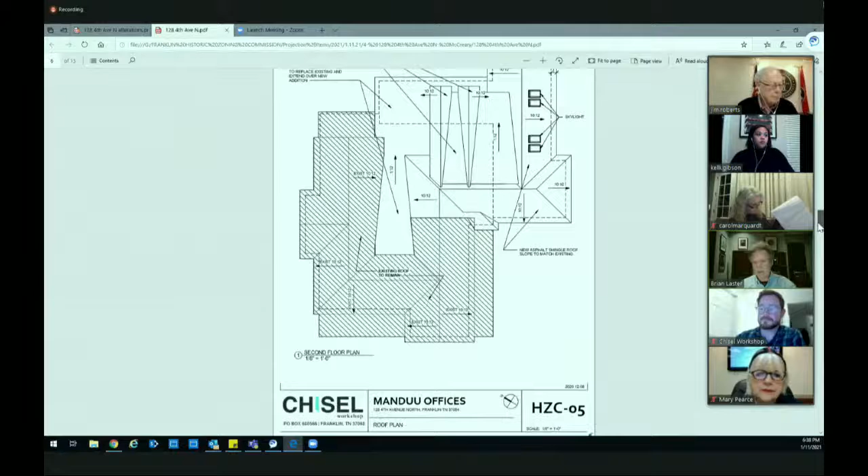Yes, Mr. Chair, that would be very helpful. Just of note, this is from HZC-06, which shows a 2D from the front. I know sometimes it's challenging on the 3D versions as well, but it almost looks like the addition to the right is almost as large as the house is to the left, considering where the porch ends. I think we need some discussion about that type of scaling for a historic property of this nature.

Mr. Chair, the other thing that was confusing to me, which I said earlier, is staff saying they don't show enough parking, and then we're approving the addition. I don't understand if the cart's before the horse, because if both things have to happen—if you have to have an addition and you have to have a certain amount of parking for it—I'd love some more information on that.

Okay, and you understand that it's been revised from the 14 to the 12, right? And do they achieve the 12 now?

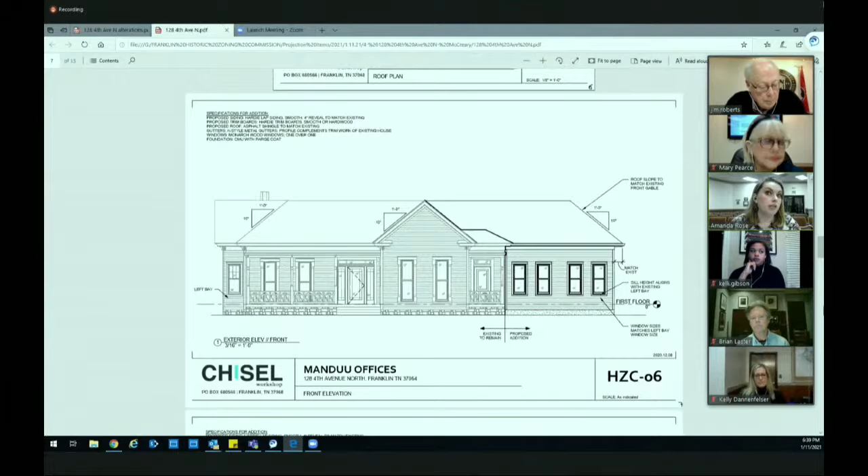I can speak to that. Right now, the parking does not show 12, but parking requirements can be achieved off-site. That would allow the applicant to meet the requirements of the zoning ordinance without altering what has been approved by the commission in terms of site configuration. So if the applicant chooses to move forward with modifying what was approved tonight in terms of parking, they can bring that forward, but there are ways to achieve the requirements of the ordinance without doing so.

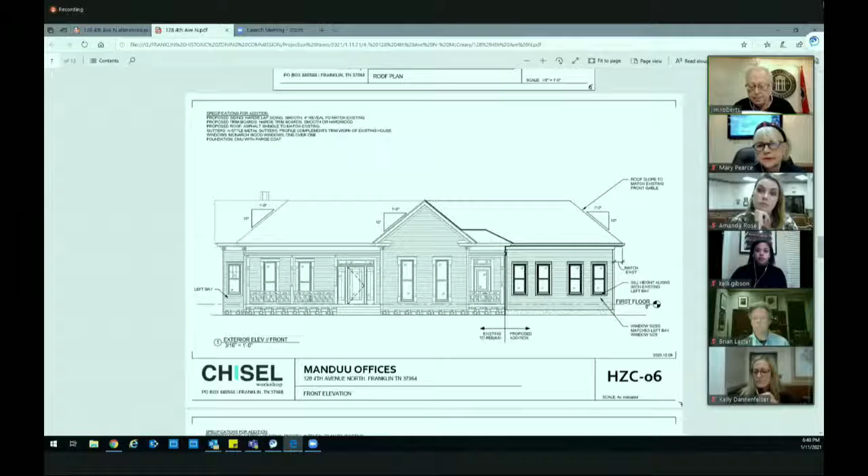Okay, are there any other comments relative to before we vote on the deferral? Mr. Chair, this is Susan. I just have one more comment. From the 2D elevation, even though I realize the addition is set back, it's coming across as a duplex. I think it's important to have this still read as a single dwelling, even though it's obviously for commercial use. That's what I'm having some concerns about.

Thank you. Which drawing are you talking about? Let's see, it was the one that was just, I guess, HZC 06. So if you look at that drawing, it almost looks as if it's a duplex, and the addition is... Gotcha. Yeah, that's my concern. Thank you.

Ms. Besser, just to provide some information to the applicant—is that because there is a door underneath the side porch that would appear as a second entrance, and then there's the door on the main porch? It's part of it, but I think if the addition didn't come out as far, it would be less so. Right now it almost looks like the gable front is almost in the center, and then you have these two—it just comes across as a duplex to me.

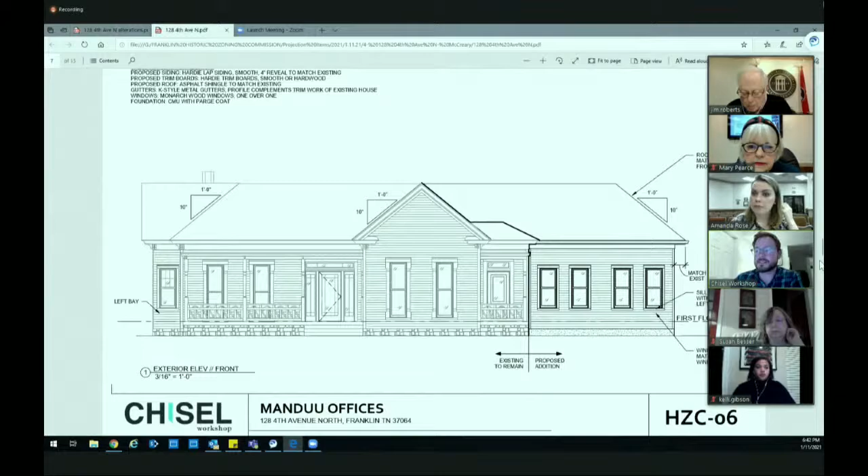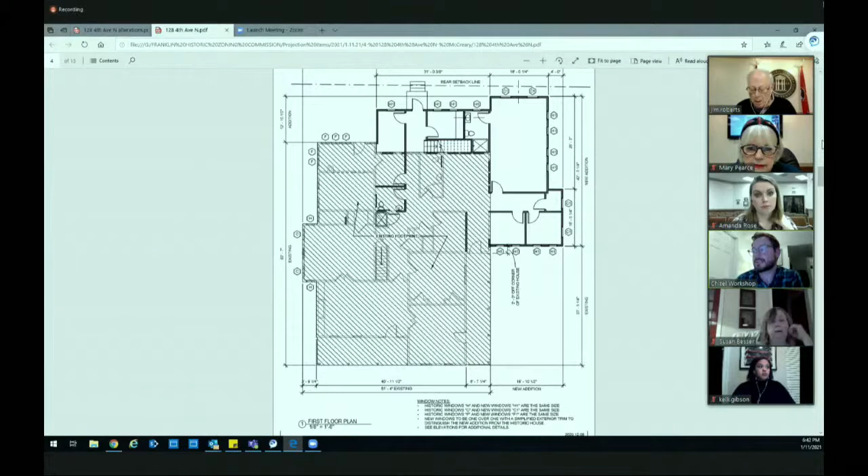Jason, how far back does this addition sit on the property from the front of the existing structure? It sits 33, almost 33 and a half feet back. If you see that on HZC 03. Okay, I was looking at 01. Okay, I got you. Yeah, so the addition is less than half the width of the existing structure on the front. And that door is existing, the one on the right side of the front gable—that is an existing door into the property.

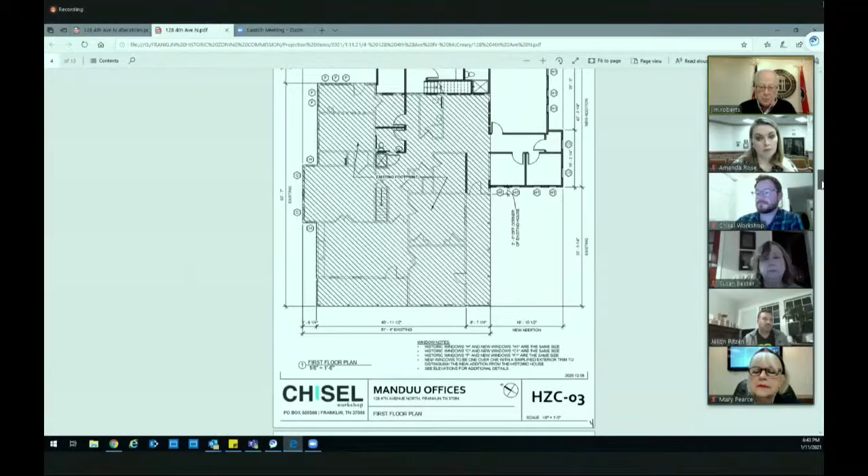And that's the porch that runs the long way on the side of the house, really, right? Yes, sir, that's right. But I think looking at HZC 06, to further what Ms. Besser says, it looks like that is a very large addition on there. It's perception more than probably reality, but I think that's her concern. Would that be correct, Ms. Besser? That would be correct. Thank you. Those 2D elevations are always hard because—they are, no question—and that's what we got to deal with. That's what causes some trouble a lot of times for us, not just this one.

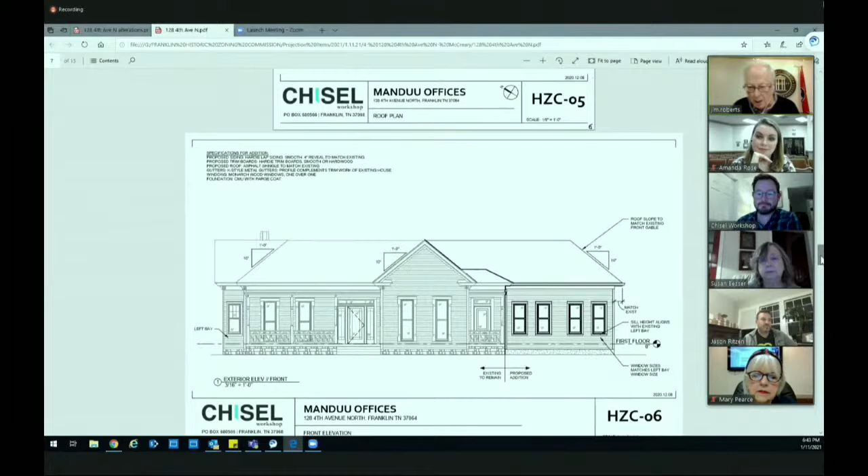So HZC 012, or HZC 12, the top elevation rendering doesn't help that perspective for you all? No, I don't think it does. I will say, as a designer, perspectives can be deceptive as well, so that doesn't necessarily help me, but I appreciate that.

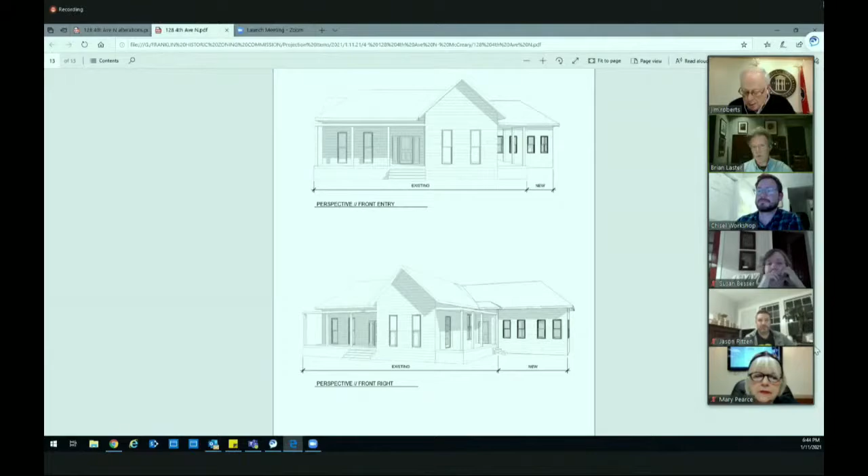Thank you. Sure. Jason, this is Brian again. So looking at HZC 03, you're saying the length of the addition on the front is almost 20 feet—let's just round it up to 20. And then from the gable to the end of the porch is about 40. Yes, so you could almost divide that into 3.

To speak to Mrs. Besser's point, saying that it looks too symmetrical, too large. That's my initial perspective, the way I see it when I first look at that drawing. I know this house, it's unique in Franklin, I think it's a very special property. I'm thinking a little extra time to really think it through could have some very positive effects.

All right, are there any other discussion on things for Mr. Ritzen and Mr. McCreary to think about before we vote on this? We have a motion to defer then. Just a reminder, if I could interrupt, just a reminder for photographs, please. Yes, I think he's got that from all angles in and around that property.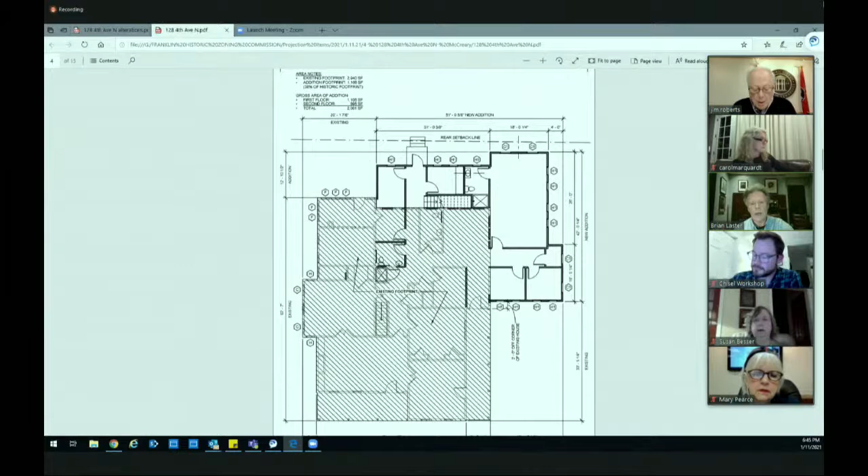Any other comments from the commission? Jim, do I understand that they're going to do some kind of marking that we could just, that's what, photographs and markings. I think that's what we've talked about. It would be wonderful to be able to do site visits as we have done, but that's not permitted under our current COVID restrictions. So anyway, I think the photographs with your markings showing on there will be of help. I hope it will.

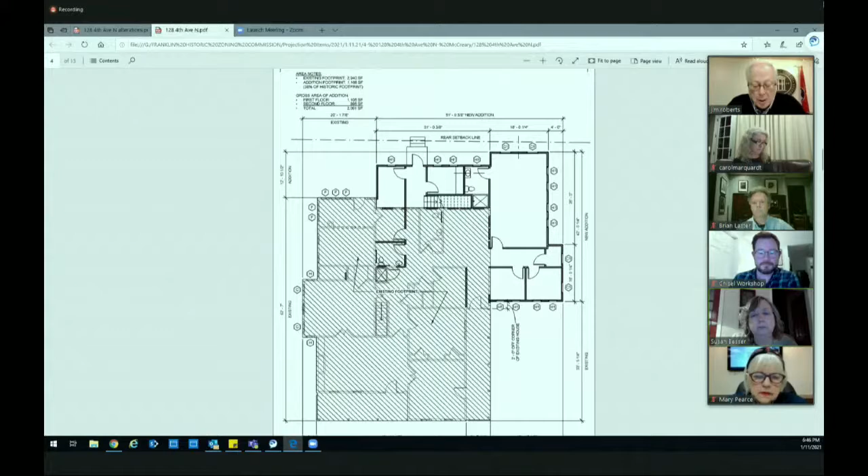All right, we have a motion to defer then to the February historic zoning meeting, and then the applicant can come to design review next Monday, if they so choose. Kelly Dannenfelser, aye. Susan Besser, aye. Brian Laster, aye. Carol Marquardt, aye. Mary Pearce, aye. Kathy Worthington, aye. Jim Roberts, aye. Okay, thank you.

We are now on to our next item, which is consideration of additions and alterations, breezeway enclosure, removal of window bays and modification of roof lines, opening on non-historic additions, shutter and garage door replacement, select window replacement at 402 Bridge Street.

Ms. Rose: Thank you, Mr. Chair, and I appreciate you reading all that. It's very important to staff that the agenda that's published is very clear to the public what is being achieved. But unfortunately for you, I've tried to clean some of that up a little bit in your motion, so you're not voting on each of those individually.

The applicant is proposing a number of changes to the property at 402 Bridge Street. The subject property is a corner lot, and it features an 1830s historic structure, and that portion fronts Bridge Street. The historic structure also features a circa 1900 addition as well as one from 1981, both designed as wings off the rear elevation and massed toward 4th Avenue North.

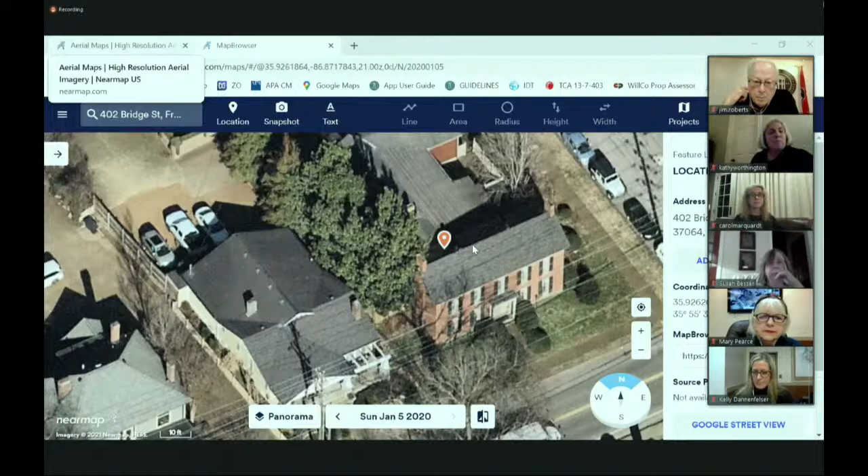I'm going to pull up a really cool tool that our awesome IT department just provided to planning staff. So you can see on the screen here, this is the original 1830s federal style structure. There is a circa 1900 addition winged off the back here. And since that point, in 1981, the owner added this addition that is mainly massed toward 4th Avenue.

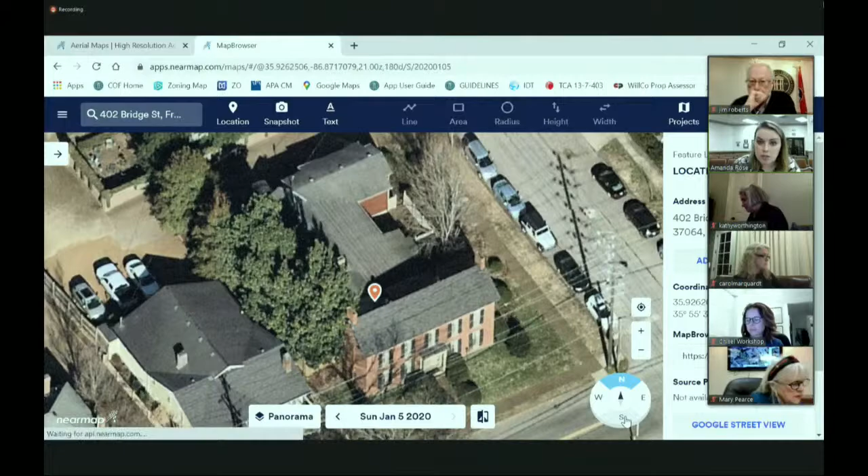So the scope of work includes the construction of a second story floor, which is primarily proposed to be placed on top of the portion of the building here. It also includes modification of the existing garage size to add a bit more square footage by changing the depth about 2 feet, and the alteration of the roof lines on this 1981 addition. I'm going to turn it around so you can see that a little bit better. You can see there's a breezeway here, there's some window bays, so the proposal will make some amendments to those, as you'll see shortly.

The alteration of some windows through the replacement of some non-historic windows throughout the structure, and the replacement of the garage door, which is oriented toward the back of the property, as well as the replacement of all the shutters throughout the structure.

The applicant did appear before the DRC to discuss this proposal in November and again in December last year. I have to say, as an aside, I usually have a difficult time changing the year date. When it's January, you keep wanting to write the same date from the previous year. This year is not that case, I never write 2020 instead of 2021.

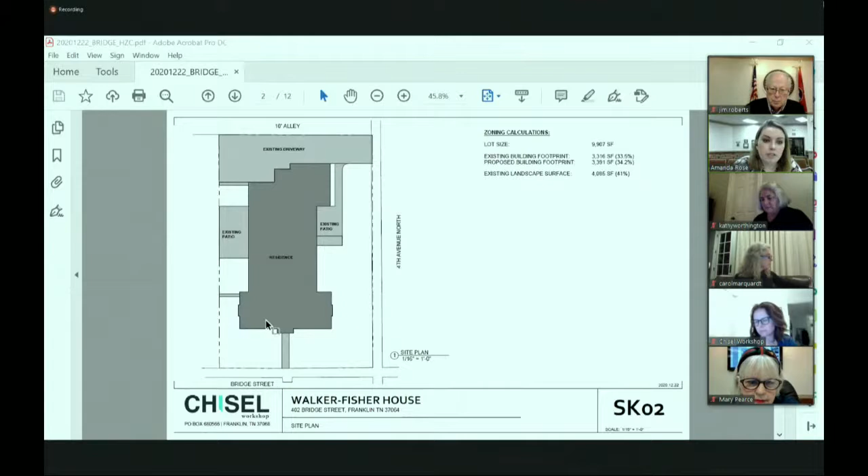All right, so I'm going to switch screen to show you the plan set. Here's some more photographs to help show the property. I'm going to start with additions. So the upper level addition ties into this 1830s mass, and you can see it better here.

Ties into the 1830s mass. You can see in this pinkish area on the second floor where that is proposed to go. It creates a T shape in doing so with the original historic form. The ridge aligns with that of the historic portion.

Since this is a corner lot, the proposed addition is highly visible, which is not entirely keeping with the recommendations of the guidelines. It is, however, situated onto an existing addition that is also very highly visible. Because of this, the DRC expressed some concern about the proposal's overall massing.

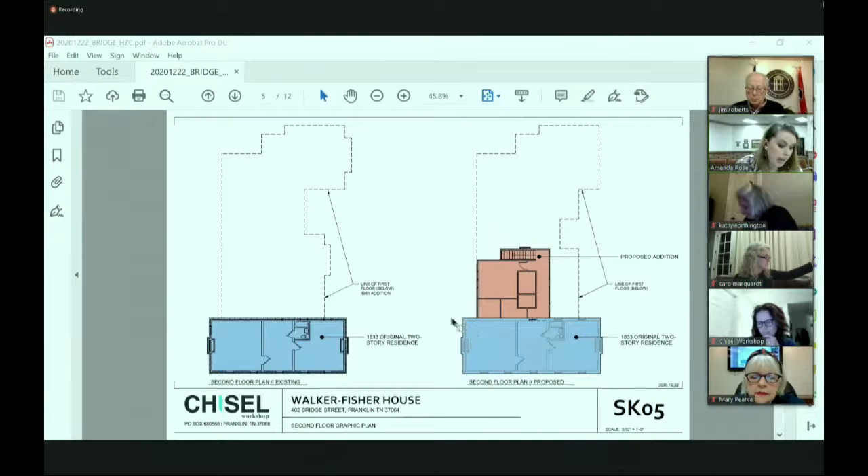The applicant has revised the proposal to address those issues, incorporating some recommendations from the DRC by lessening the overall proposed square footage of the upper floor by recessing its mass away from this front corner, which leaves the 1830 structure more fully exposed at the rear corner.

I'm going to switch angles so you can see that a little better. So this is existing, and here is the proposed. As previously brought forward, the upper story actually covered up this second window. Now you can see it keeps these two windows exposed, so you can really experience the scale and the mass of the original structure.

The circa 1900 structure up to the addition is back here, this line, and the applicant has adjusted it more toward that. However, that addition's not so readily visible from vantages you see here from 4th Avenue or even from Bridge Street. But the applicant has tried to design the structure so that you can see this circa 1900 addition still exposed.

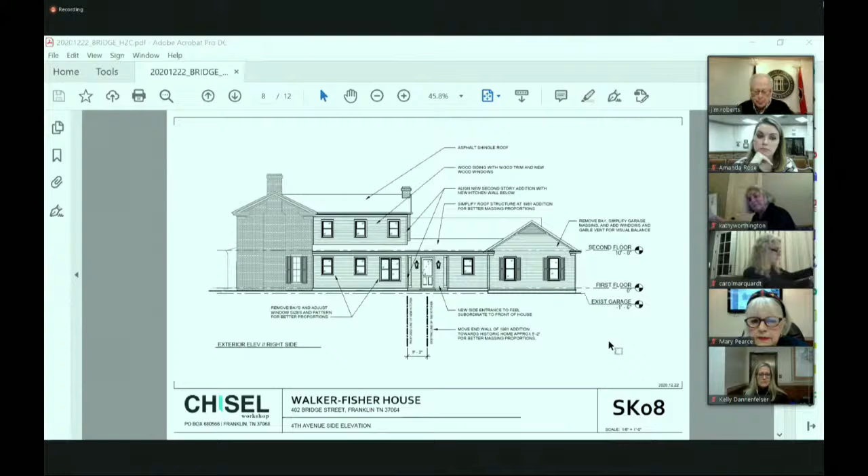So we do see 2 full window bays. At this point, the only window we'll be missing from the historic is the one that has already been replaced and is not the historic window, the one in the middle of the 2nd floor. And the other part that was really important to me is that we line up the 2nd floor addition with the 1980s addition on the 1st floor.

And we did that to begin with, but I think that made the addition too big. So instead of trying to align the new addition to the 1980s addition, let's make that 1980s addition shorter. So we've moved that side wall where that breezeway is towards the historic house 5 feet. And so then when we're stacking the new addition on top of the 1980s addition, that scale is appropriate for a federal style house.

And taking that off, I think the other part you see on this drawing is I've always struggled with that garage and that double gable, it's so tall and so prominent. Let's just strip all that down and make it more simplified. So the thought process here is moving that back and getting it better in scale to tell the story of today's time, what has been done to it over time, but also to get it right in scale. And we feel like we've done that well with this proposal.

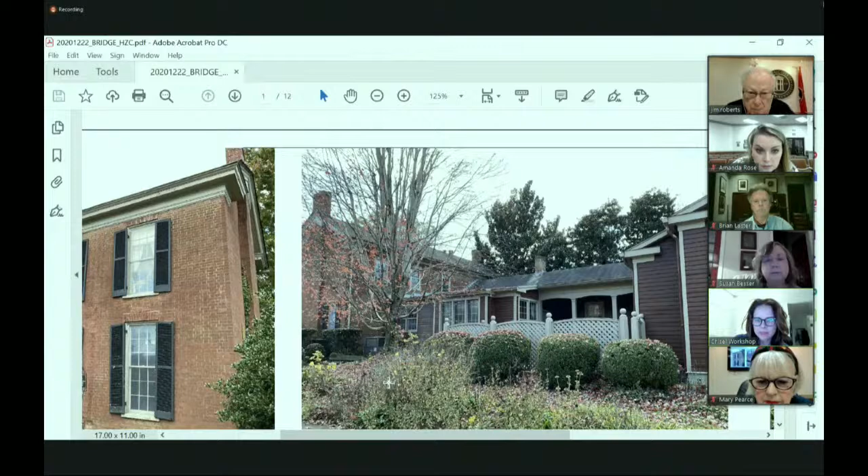All right, discussion. So my first discussion is windows. If you look at the front of the house, the lights are 9/9. So what we're shown in the drawing to the rear elevation for 4th Avenue, we're seeing 4/4. Is it truly 4/4? Yes, sir, it is. So the windows that are larger in scale, the front windows are 9/9, and the window on the side on 4th Avenue, you have to move your cursor over a little bit, Amanda, it's hidden behind that tree, is 4/4. So that happens on the other side as well, any windows smaller in scale are 4/4, and the larger windows are 9/9.

Amanda, I hate to interject, but as I'm looking at that, these appear to be 6/6. Those existing ones, yes. I was talking about the historic one that is on the historic brick portion. I see, on the left, bottom left. Yeah, it's actually next to the chimney.

Yes, the one next to the, you can see it on our elevation. Yes, that one is a 4/4. Okay, thank you. I'm pulling up my pictures right now. I'm 95% positive it's the same way on the other short end, on the opposite side, the courtyard side.

So Susan, with the motion that said multi-light, are you suggesting 4/4? Well, I think that, Mr. Laster, each window may be different, because there's several different sizes. So I think that's why I say it would come back to staff, because I can't say that it would all be 4/4, because that may not work.

And I think I see Amanda McCrary shaking her head as well. I think that they would have to be considered per size. I would agree with that, because I'm big into windows too, Brian. I don't think that a one size fits all is ever appropriate for windows, because we want to always maintain that proportion in the panes that is taller than it is wider, that historic proportion.

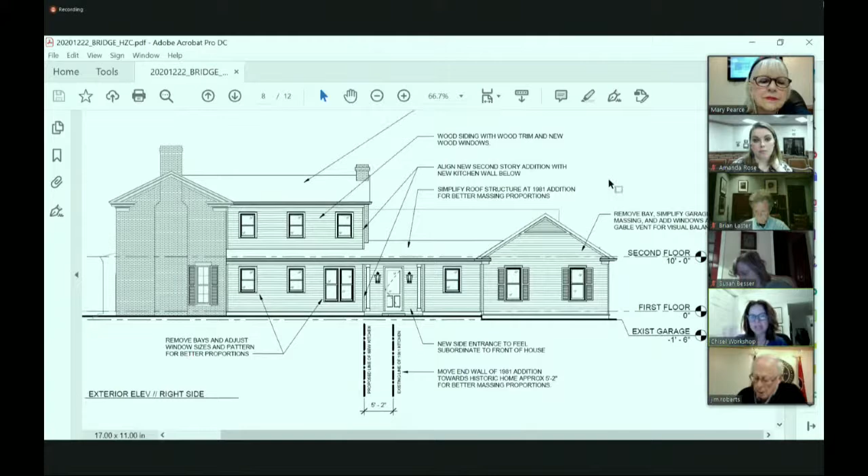Mr. Chair, that answers my concern. Thank you. Any other comments? I'm going to read this motion when we're through with comments, as I've written it down.

Mr. Chair, I have some comments or questions. Do we have an existing left side elevation? I didn't see one—photograph or elevation? Just anything, I just want to see the left side. We don't have anything existing on the left. I did note that as I was reviewing it.

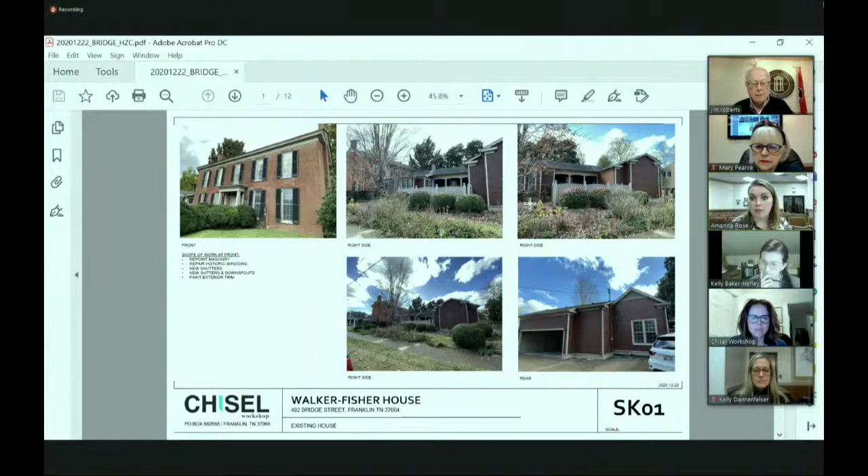I try to use some vantages from Street View. I can try to pull up a tool to see if I can provide anything on the screen. If you go to SK10—that's from the back looking forward. Right, so it's just really hard to photograph. Yes, it is. Really, really tight, and that's as wide angle as I can get.

But this existing portion here is the same as you see below. Everything in this drawing is original as-is, except for the second floor portion that pops out above the bottom portion. So I was looking through, and I don't know exactly which drawing it was.

Oh, here we go—on SK12, it appears the existing 1981 addition has a chimney. Are we losing that chimney? There is a chimney there. The fireplace is not functional at the moment at all, it has been closed in. From the exterior, yes, there is a chimney there.

And that was part of the reason we looked at anchoring this addition with another chimney—it's in the general vicinity of where it was. We like that look from a federal standpoint. Again, it anchors an elevation and a gable that's very common on additions to a federal style house, and it gives a nod to the story that was there instead of just taking it off.

It is our intention to use a tumbled brick. We don't intend on using a typical brick that you would see—a spec shiny brick, for lack of a better term.

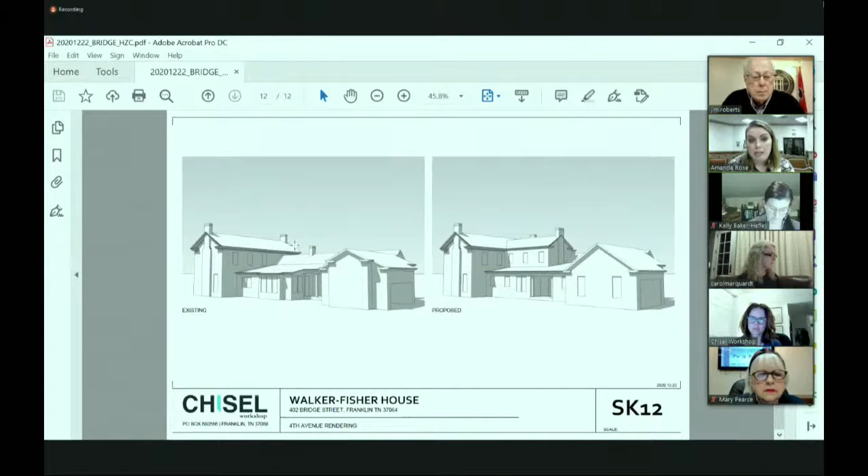The role of the staff here at the historic zoning level would be to try to maintain that as much as possible. And to your point, Ms. Marquardt, the proposal for an addition does cover a portion of that. In looking at this application, it was important to staff to ensure that the vantage points of this addition as currently seen from street view, which is very little, still be maintained.

And so the design that you see in this upper corner is largely untouched, as Ms. McCurry said. You do have a pretty unique roof line extending from the building, and you can see that here. So it's very clear that the 1900 portion is untouched, and this portion will be pressed back off of it, but also pressed back off the other side to help maintain the corner that is highly visible on the other side of the very original form. It's a long, convoluted explanation, but I hope it helps.

No, thank you for clarifying. Yeah, that does help. Any other comments?

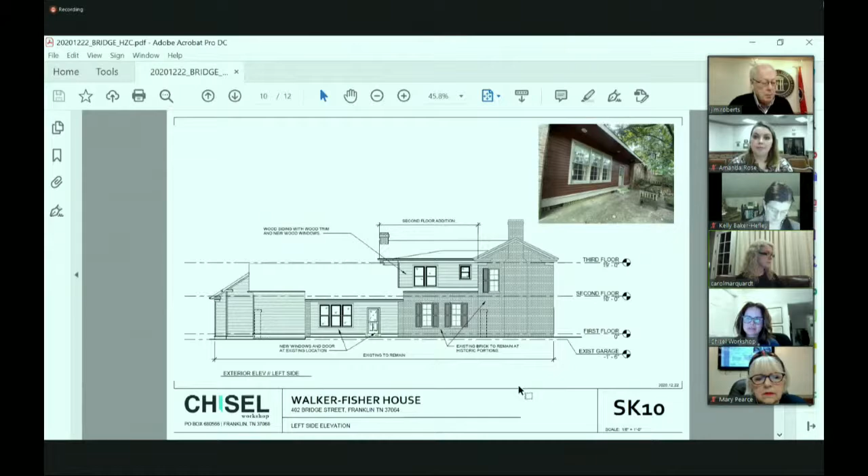Yes, to speak to Lisa and Kelly's point, if we were tearing down and demolishing that 1981 structure, I would have trouble voting yes for that. But all we're doing is adding to the top of it. That's right. So the structure stays.

Any other comments? So I've got a motion to approve this application with the modification of the existing windows to a multi-panel window, and for that to come back to staff. Wait a minute, multi-pane or one-over-one in certain cases, and all of that to come back to staff for approval. Is that clear with everybody?

Mr. Chair, yes sir, one multi-pane. I wrote multi-pane and said multi-panel. Thank you. Ms. Rose and I will collaborate to make sure this is correctly stated in the minutes.

So if there are no other questions or comments, let's vote. Ms. Baker? Aye. Ms. Besser? Aye. Mr. Laster? Aye. Ms. Marquardt? Aye. Ms. Pearce? Aye. Ms. Worthington? Aye. And Mr. Roberts? Aye. Amanda McCrary, thank you very much.